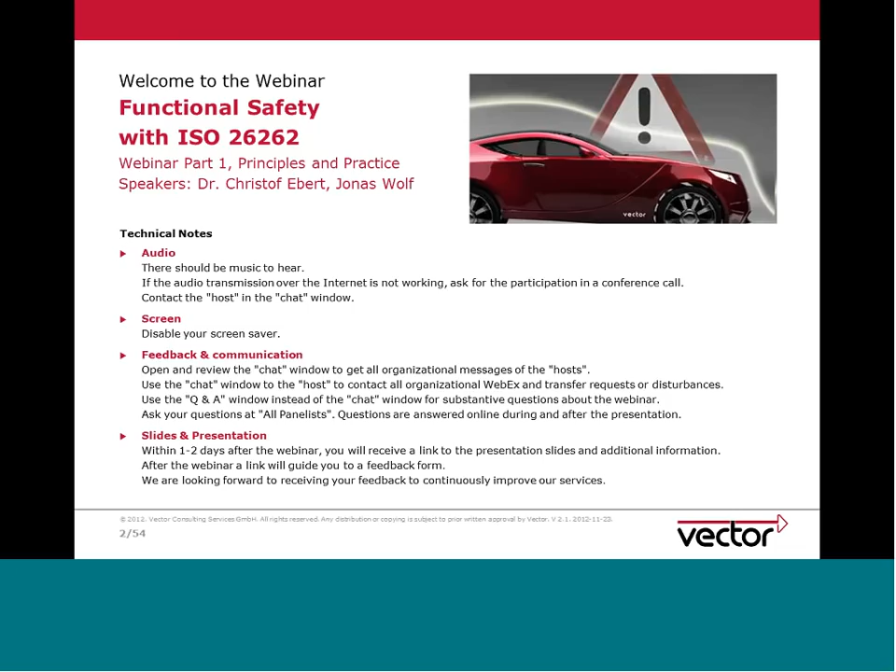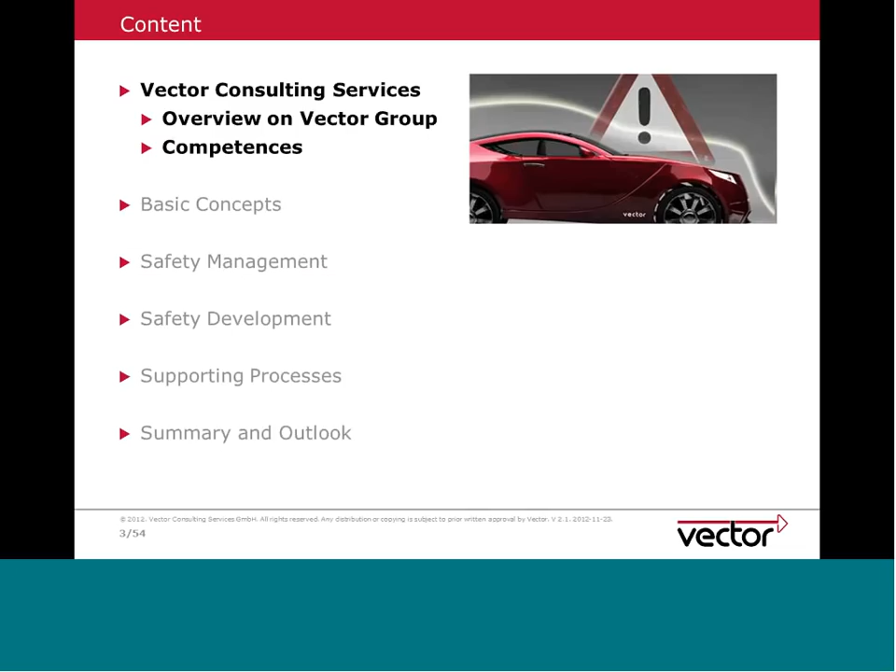The structure of this webinar is that I will give you a very brief overview on Vector. We will then go into some basic concepts about how the standard is structured. We will then have the core part, which is experiences on safety management, safety development, and support processes. And I will conclude with a brief summary and an outlook on what the standard means for different market players like OEM and Tier 1, but also what will be the evolution.

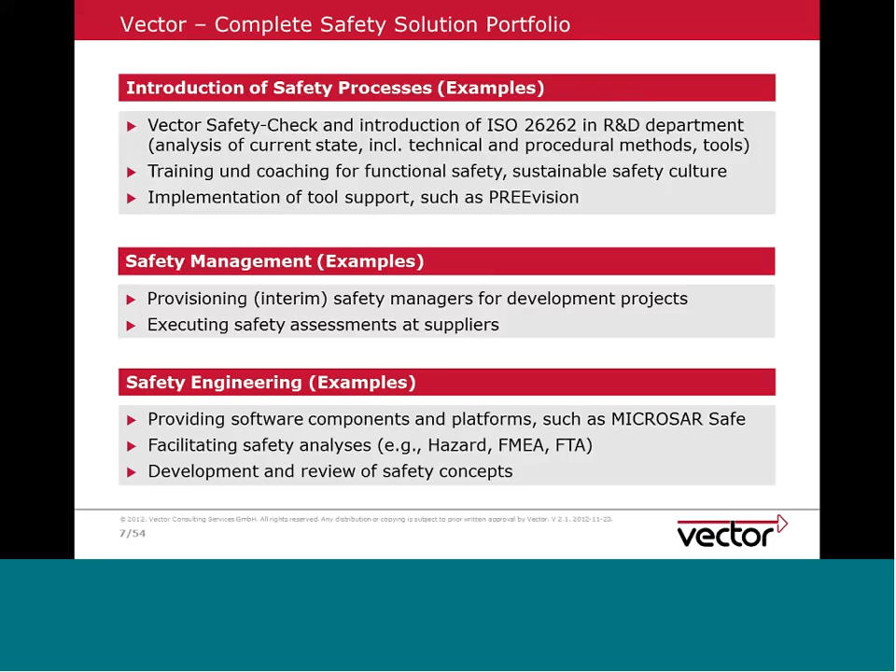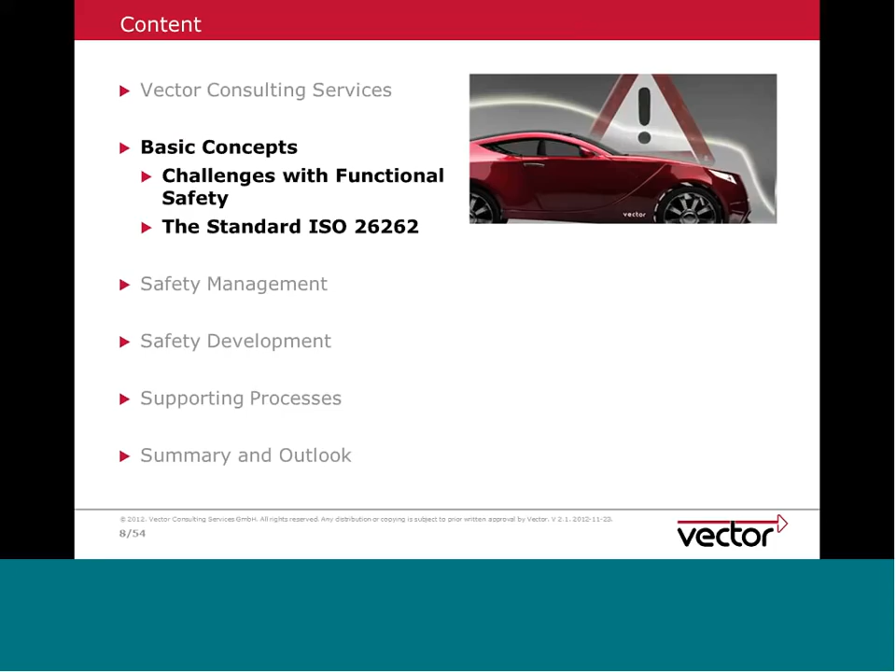After this brief introduction, we will now look into basic concepts of the standard, just so that we have the right motivation. I keep this short because I assume that most of you have already been exposed to the standard. As said, the majority of this webinar should be on practical experiences.

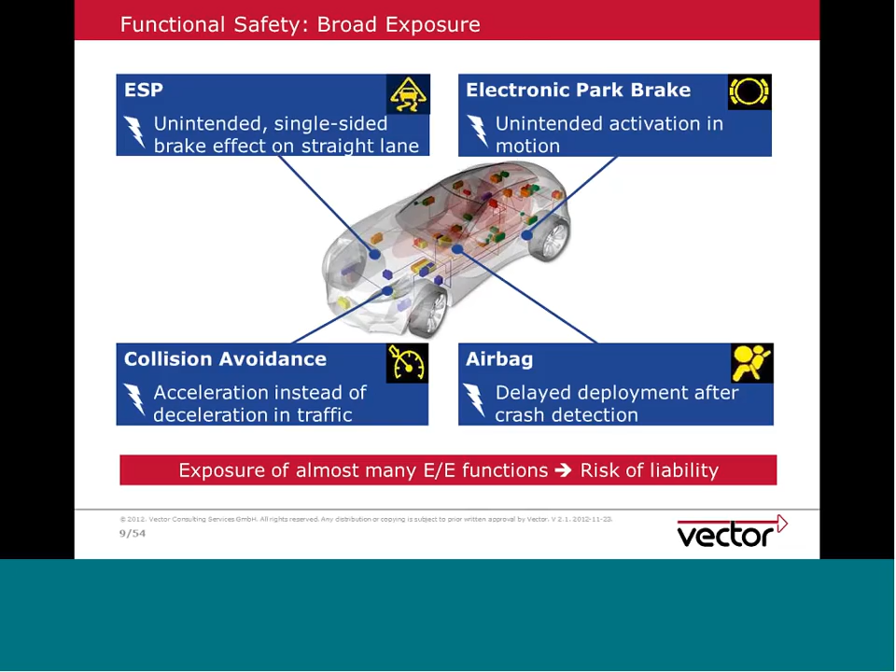Functional safety has a broad exposure. We see that with the growing interworking of a variety of assistance functions inside the car, that all have, for instance, elements of impacting the driving dynamics, and that of course then could create safety risks for the driver, but also for the public. And for that reason, there's a growing need due to this broad exposure of the E/E functions to make sure that they perform as intended in order to limit the liability risk.

Functional safety not only has a broad range of different functionalities, but also wide impact across the life cycle. If we see the life cycle, it's not only related to, for instance, testing, but it's indeed end-to-end from a system concept to the different implementation steps up to the integration and release, including also field operation. And we show with these different colors how different activities are impacted by the 26262.

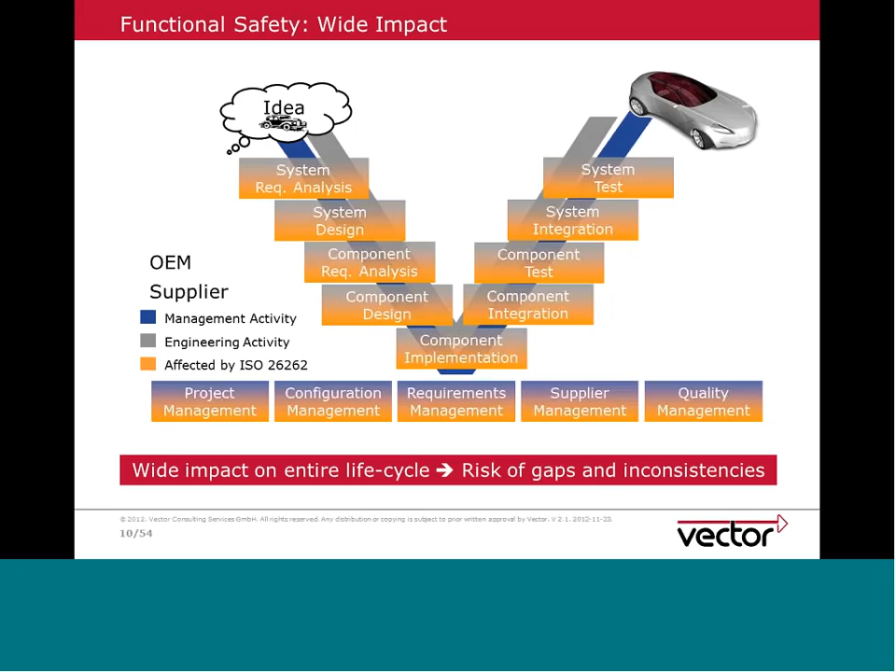And it also means that clearly OEM and suppliers are impacted. Even if the liability is initially with the OEM, certainly the supplier also has to make sure that he follows with his components the overarching safety requirements.

Functional safety can be achieved with many different techniques. So from a mere economic perspective, we should also be aware that we use the right methods and techniques. We have seen with customers often a kind of overkill in certain arenas on the right side of the V, a lot of overlapping verification and validation techniques, which in the end create extra cost but not much extra value from the perspective of safety, and maybe even provoke certain gaps just because there's a mismatch in understanding the methodology.

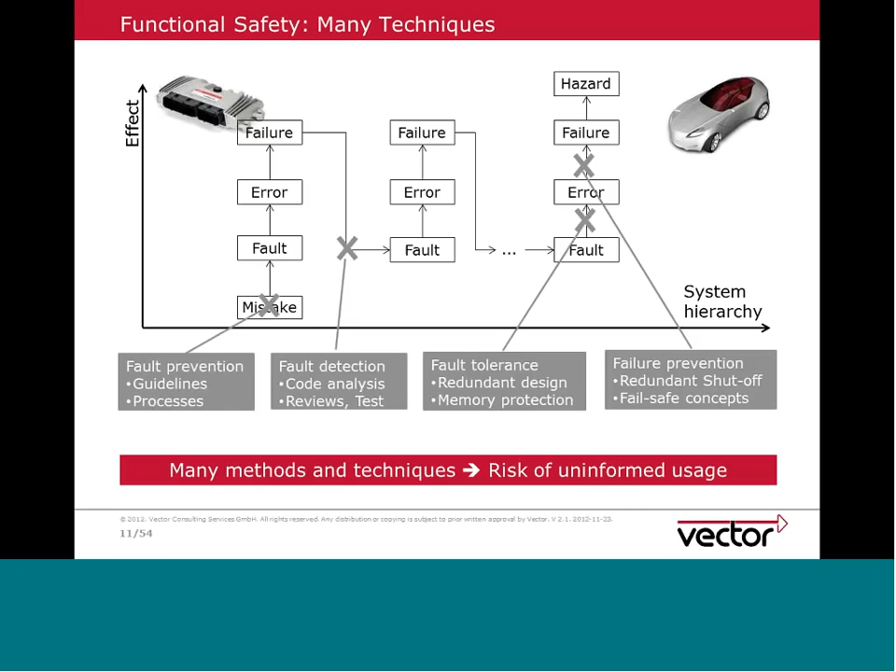So we need to intelligently combine techniques for fault prevention, detection, tolerance, and then also failure prevention. And only this intelligent combination can make sure that the standard is useful also from an economic, that is from a cost-benefit perspective.

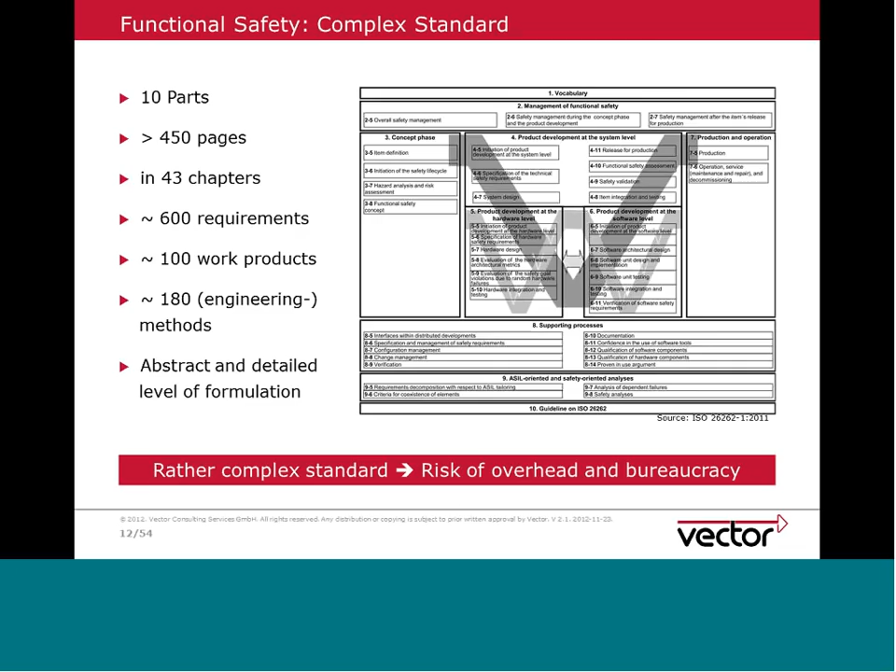And then we also have book 9, which shows how the ASIL oriented safety analysis is done. All that creates some 600 requirements that have to be addressed, and you see from this mere complexity that if the standard would be bluntly copied in terms of, let's say, let's do this and that and that, it can be extremely expensive, and at the same time maybe still create gaps because of misunderstanding of what is the intention of the standard. In other words, there is a risk of overhead and bureaucracy which has to be handled, but there is also a very big risk which we often face, which is uninformed usage of the standard.

If we develop safe products, this has to do with trust in the products, but also it has to do with what the ancients have called a moral commitment. I quote here Werner von Siemens, who said the prevention of accidents must not only be considered as a regulation by law, but also as a matter of human commitment and economic reason. What he emphasizes here is a mismatch which we still see today, that we sometimes hear what do we have to do with respect to the standard so that we are safe in case of lawsuits. Now, this is certainly a strong motivation which is driving many engineers, but initially we should rather think in terms of what do we really want to deliver as a product, what is the market perception, and at the same time also what's our business reasoning.

As I said earlier, each of the 600 requirements of the ISO 26262 creates its own cost-benefit calculation. So we have on one side a legal obligation which is certainly there and which is growing, but at the same time also a clear market and business perspective which helps us to balance the different requirements with respect to the business value. Now, what does it mean to build a safe product?

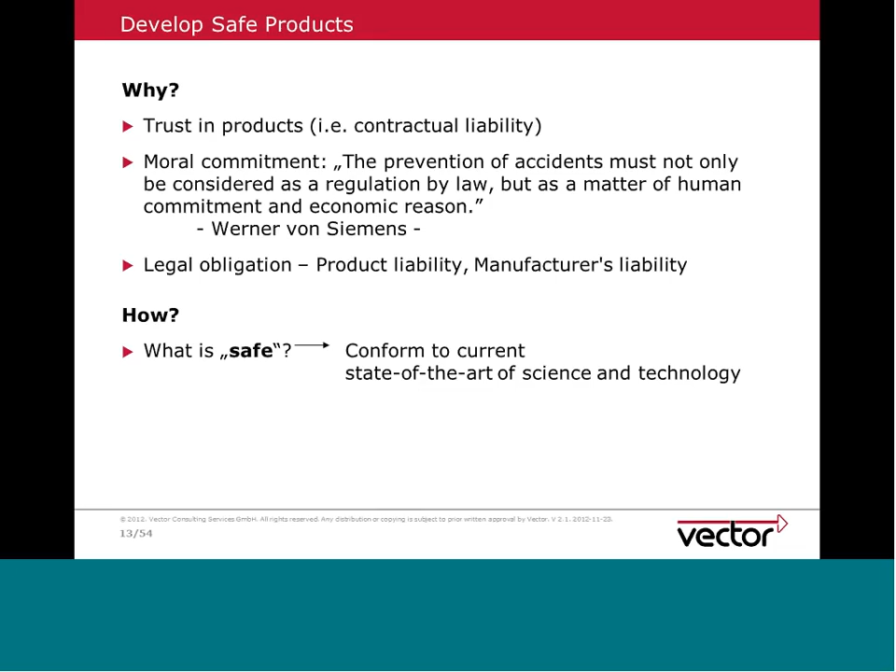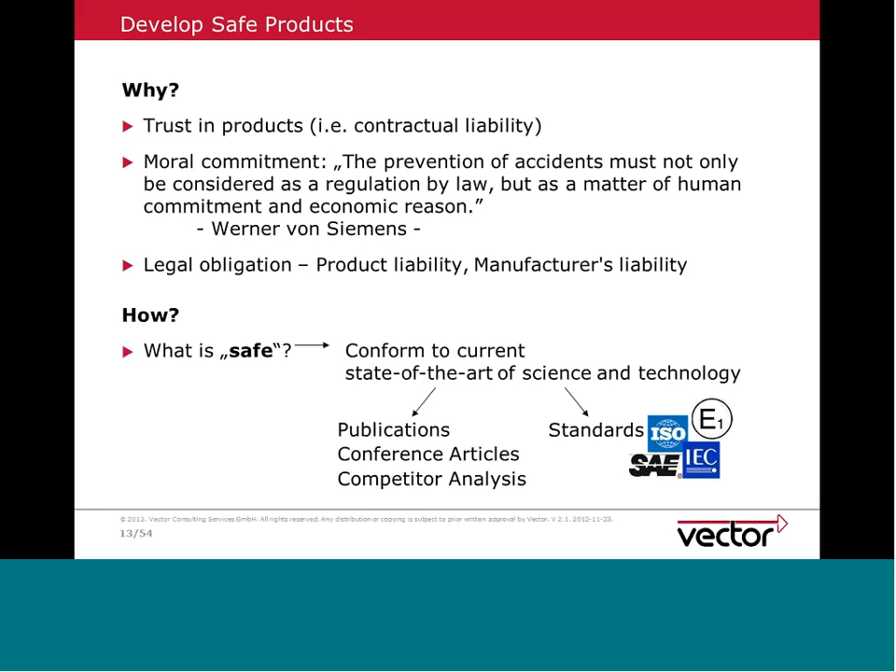The simple answer would be it should be conforming to the current state of the art of science and technology, which is typically brought together by, let's say, publications and at the same time also standards such as the ISO 26262. Such a standard summarizes the current state of the art and would be used in the case of a lawsuit, to see whether the supplier has followed the principles which should be applied when bringing a product to the market. And this is exactly summarized also on the right side, where we talk about product liability, that a product put into service must provide the level of safety which can be expected by the general public.

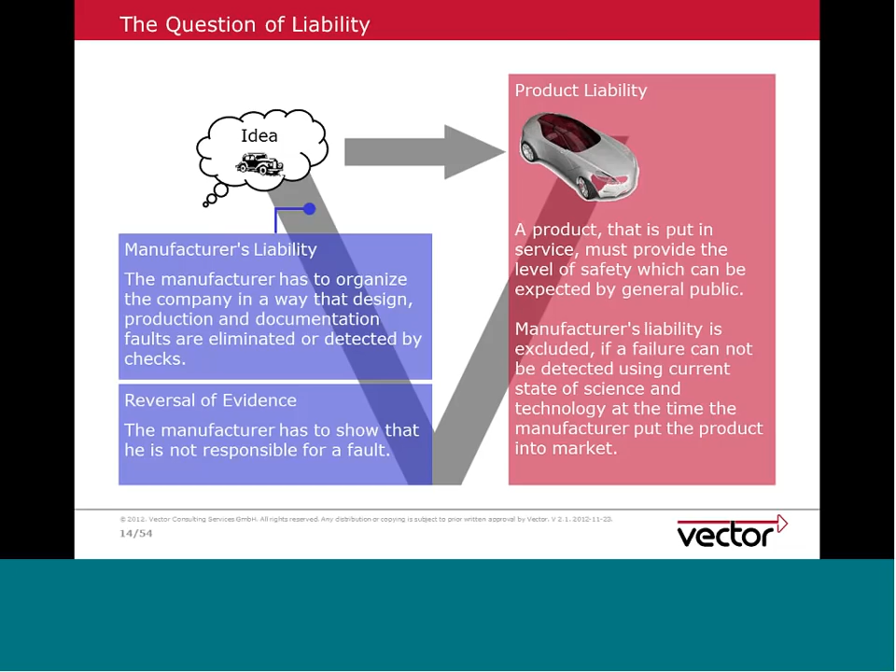When we say general public, just as a side comment, this is what in automotive is a big difference to some other disciplines such as aerospace or transport, where the assumption is clearly that the drivers, the operators have been severely trained and utilize this training. This is something which we would not expect from car drivers, and that makes the design of the product a little bit more difficult compared to what we see in, let's say, transportation.

Now, with this concept that the supplier must make sure that he follows the state of the practice, we also have the legal principle that the supplier, in the case of damage, has to prove that he has actually performed the state of the practice.

This is what we have called the reversal of evidence, and what it means is that he should at any moment be able not only to tell I have a certain standard applied, but also document by means of work products how this standard had been actually applied in the concrete design, development and production of a specific component.

Now, in order to facilitate that without much overhead, ISO standards have been created to mutually support each other. We have, for instance, process-related standards which are based on the ISO 15504, which relate very nicely to quality management standards such as the ISO 9000 series, and then specific standards for quality requirement, such as, for instance, the ISO 26262. The idea is that companies should apply all these standards so there's not a big overlap.

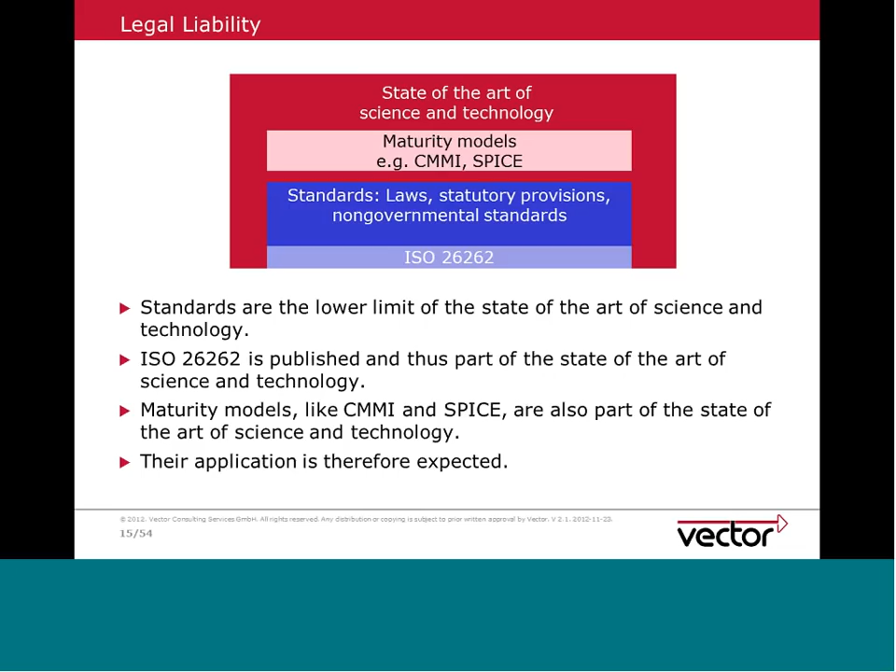The entire idea of process culture, of making sustainable change, is something which is explained by ISO 15504 and for instance CMMI. The ISO 26262 is using these concepts, and this is why we say the application of these frameworks is expected. It's not mandatory, but clearly is a huge advantage.

The scope of the ISO 26262 is initially in the domain of passenger cars, which go into series production with a weight of below 3.5 tons. Now, what it actually means, if we take this, is a rather small application domain, but we see in practice many companies which are active, for instance, with the truck industry or the vehicle industry, the off-road agriculture industry, that they would not only use specific standards such as the ISO 25119 for the agriculture domain, but would also increasingly have a look to the 26262 because of its wide range of usage and a much bigger body of experience compared to the rather narrowly used specific standards which we face in the vehicle, agriculture, etc. domains.

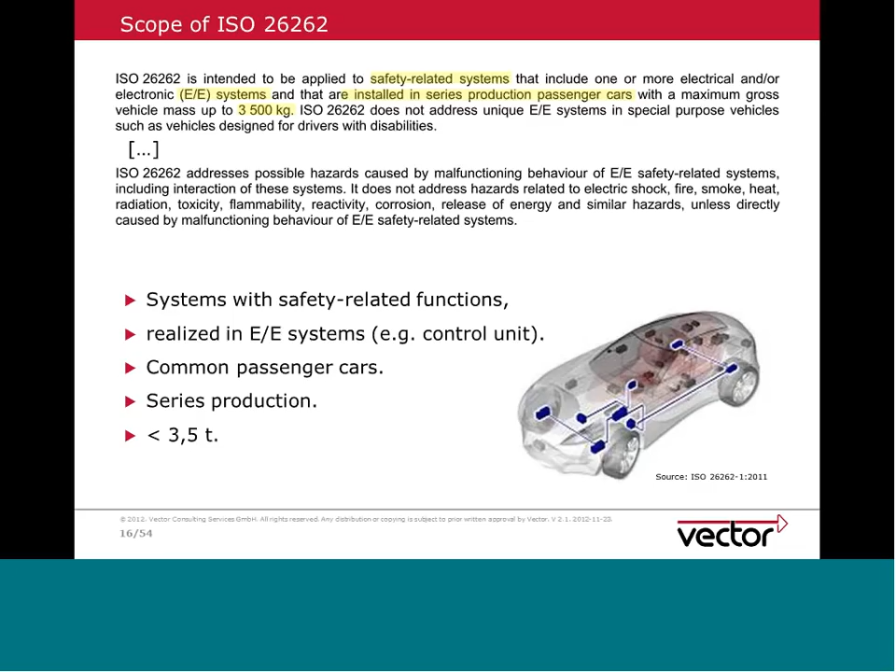In other words, what we recommend these days is that with specific standards such as machinery or agriculture related to functional safety, it's worthwhile looking into what are best practices out of the 26262. Maybe even implementing the 26262 to the certain degree that it covers the specific domain standards, but actually you benefit with respect to methodology, with respect to best practice, with respect to tools from the wealth of experiences of the 26262.

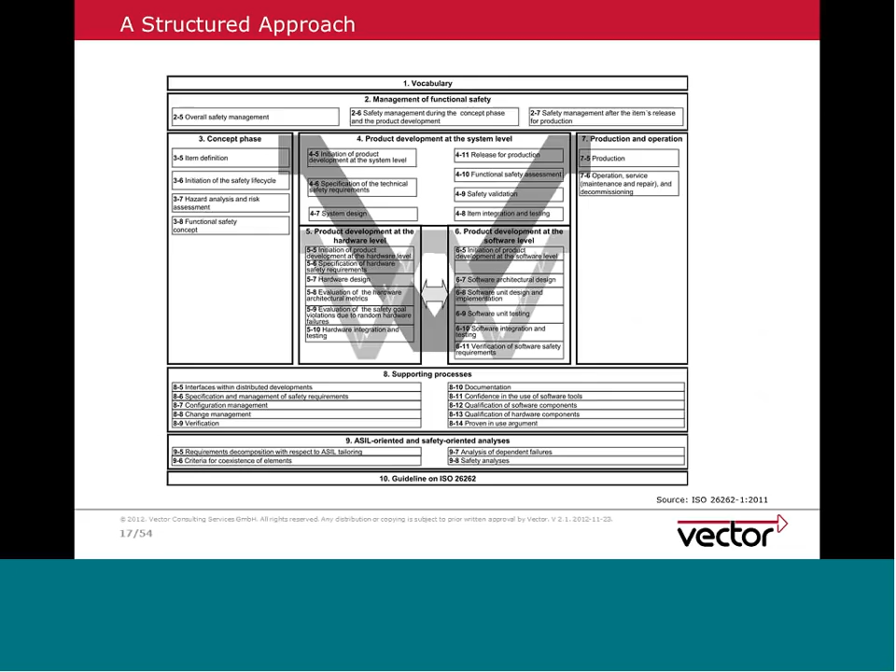We have already zoomed into the 26262. What we want to emphasize again is that it is a very systematic and structured approach with 3 basic domains, which is the management of safety, the development of safety, and supporting processes in order to keep certain safety processes up to date and also related to each other.

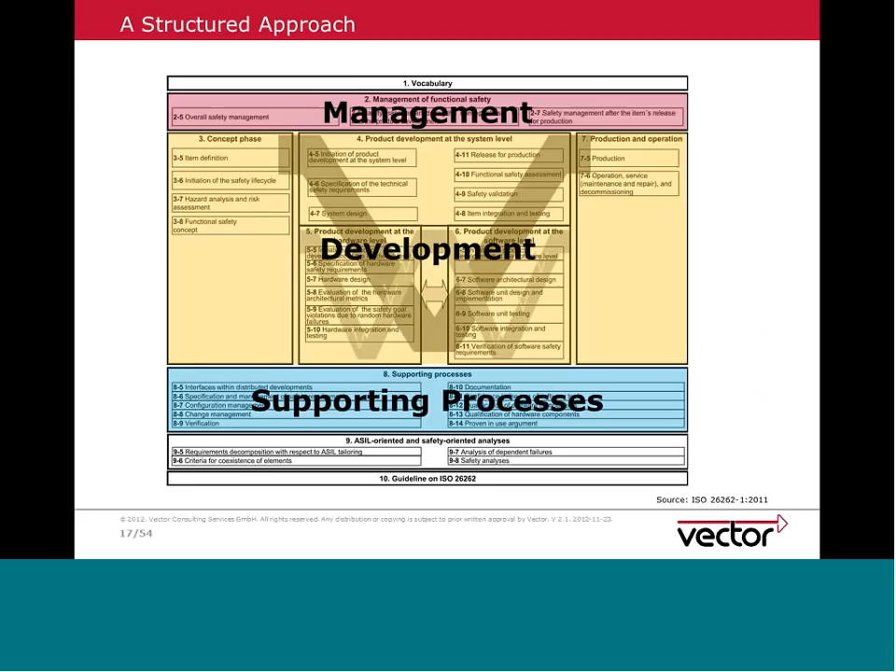We would then start by looking to the broad concept of ASIL classification, because this is at the core of the standard. And what we see is there's a set of factors which altogether give us a risk. The risk has to do with the exposure, the way we can control the specific risk, and a severity, which is to which degree would we really have casualties or accidents in the case of a malfunction or failure, and as a counterweight, what is called integrity, which helps to balance the 3 other factors.

The picture on the lower part explains this briefly. If we expect the tolerated risk for any component in a car is achieved by means of QM, which has been a long tradition, then adding some functionality could increase the exposure, could increase the severity. A brief example would be if we had in the old days a pure non-electric way of steering wheel, of braking system, etc., or of any kind of dynamic functions, adding some assistant function like an ESP or an ABS, etc., obviously adds to the risk, because suddenly some failure in these components can, for instance, mean that the brake or the dynamic stability is not anymore given.

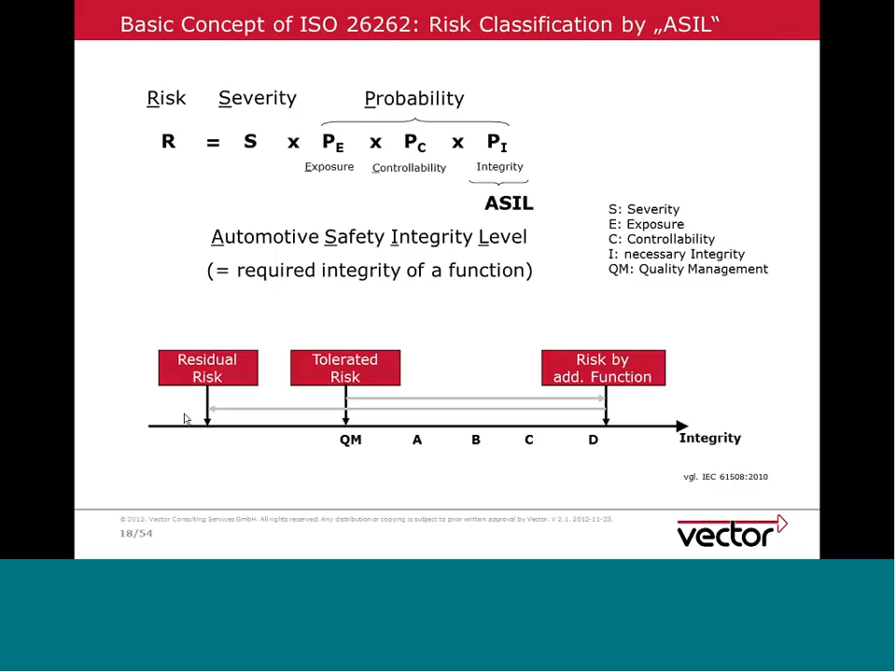A second key element of applying the standard is that we have to make sure to address both random and systematic faults. Random faults typically have to do with hardware faults we cannot really predict, we can only statistically analyze, so we have to diagnose, monitor, and make sure we have the right level of testing in order to immediately highlight if there is a malfunction on the hardware side. Systematic faults are a little bit more critical, because they have to do with the way we design, develop, and engineer, and finally test the product.

So here we need methodological, or systematic, measures, starting with analysis and design techniques up to consistent traceability and proof of safety. These are two very different approaches which both have to be applied in order to reduce the risk in the way the previous slide has just shown.

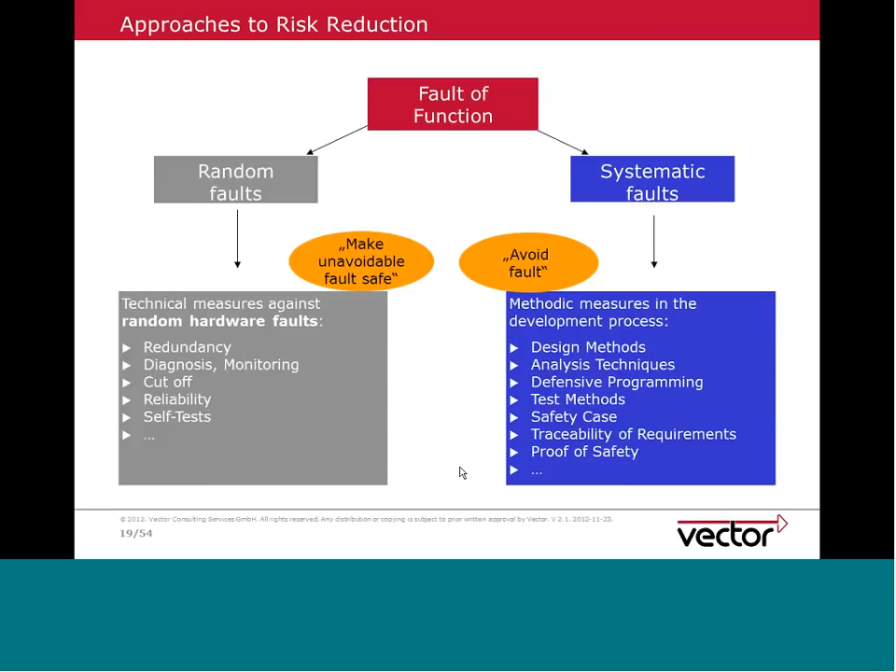Now, the determination of an ASIL level has to do with severity and probability of exposure, of control, and finally the related integrity. In other words, if we have certain controllability, say in a range between 1 and 3, let's take the middle, a certain severity which is high, and a certain exposure which is also rather high, we have a combination of C2, S3, E3 — controllability, severity, exposure — which gives us a clear mapping towards what would be necessary from a perspective of safety integrity. In that case it would be what is called ASIL B, automotive safety integrity level B. We can see with that small example that if we would increase the exposure, we immediately run into ASIL C.

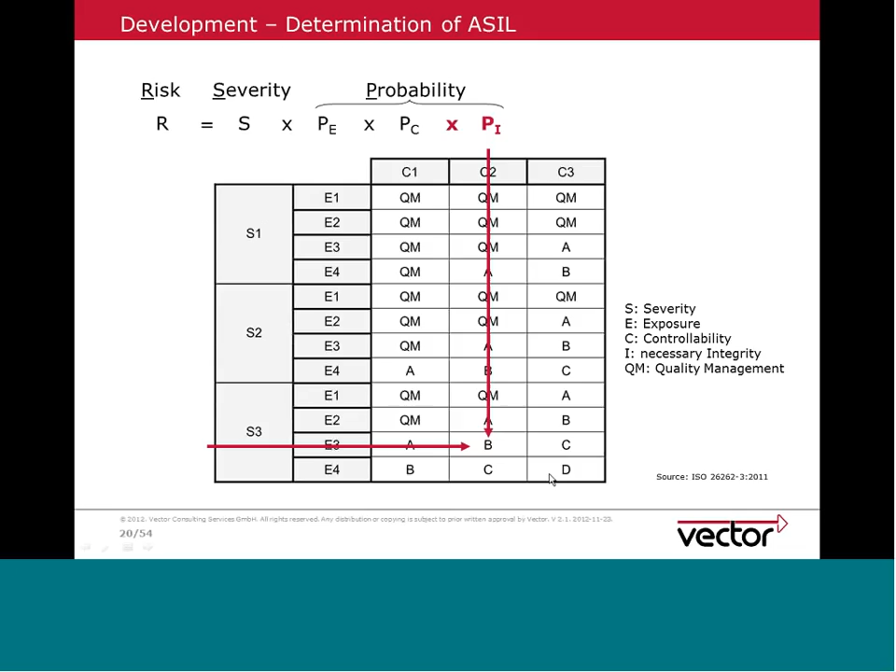The same if we would have less controllability, we would also be in C, and if both of that happen, we would have even ASIL D, which is the highest of the 4 ASIL categories. According to each of those, we would then have specific measures to apply.

Or in a practical example, as here, we talk about a brake-by-wire system, and you see that we need to look into the specific use case in order to identify hazards, which would then tell us what the ASIL level would be in this specific situation.

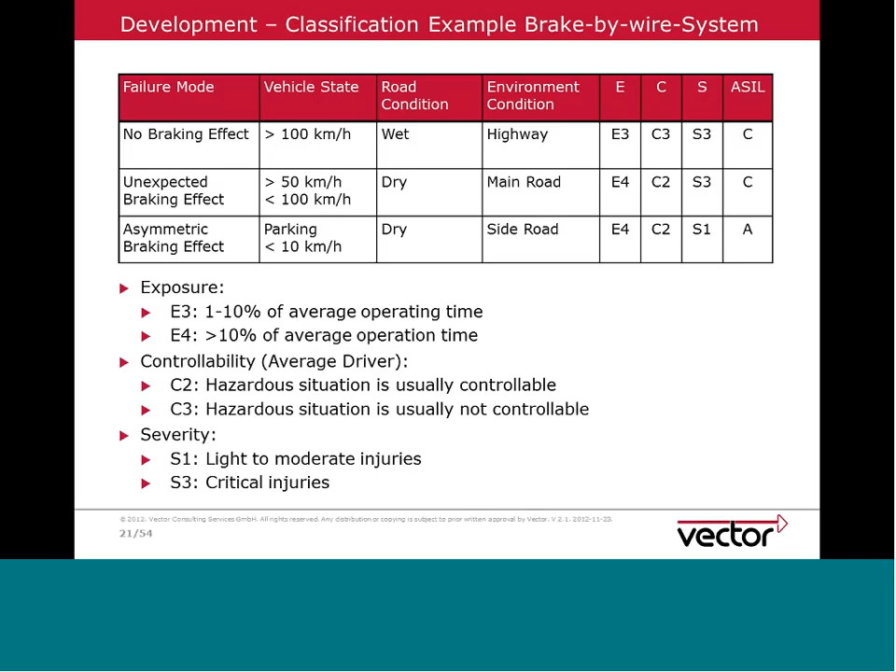To summarize this part, there is not an external ranking of systems which would tell you this system has an ASIL X and this has an ASIL Y, but it really depends on the specific use case. It depends on the design of the car, how and which of the ASIL levels would be really applicable.

Now, we want to briefly look into some of the experiences in implementing functional safety, and as a starting point, we identified a set of typical questions which are asked to us by customers, about how this or that is done.

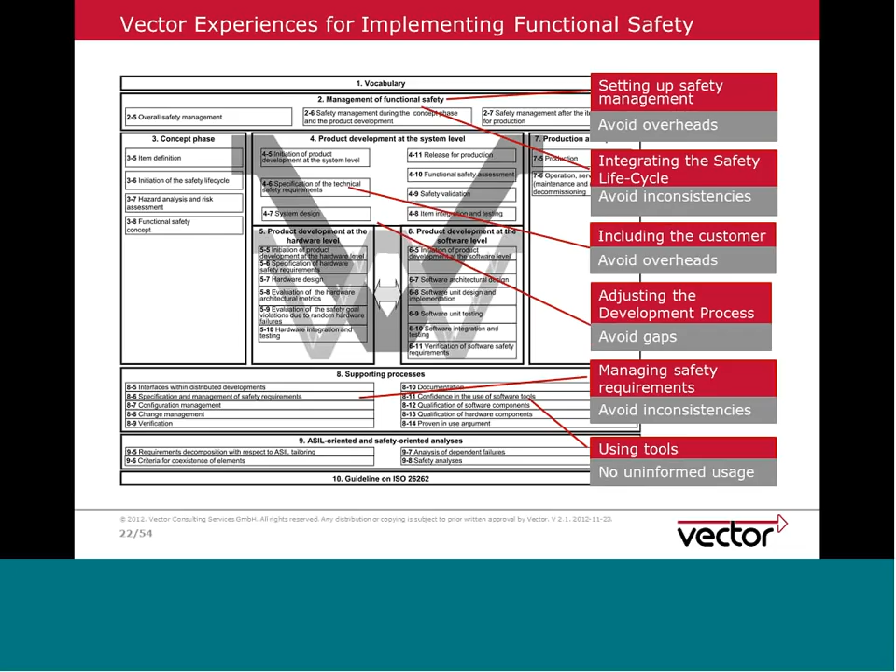We want to emphasize, and you see that in the gray boxes again and again, that it is not wise to try to copy the standard into your engineering processes. This has to be done intelligently in order to avoid unnecessary overheads.

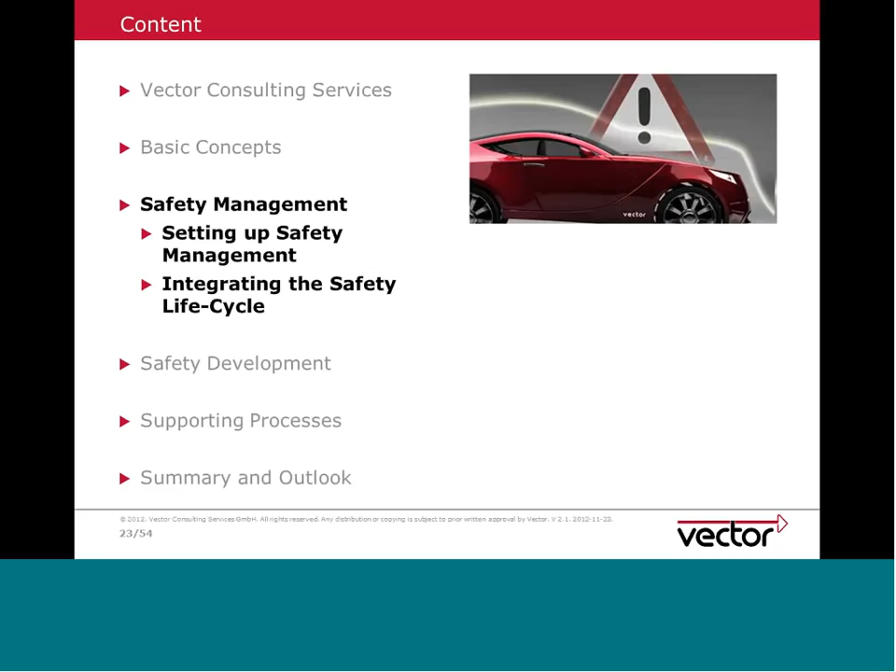Let's start with safety management, where we look into two domains as examples: first, to set up safety management, and then to integrate the safety life cycle. Setting up safety management means that we have an effective and at the same time lean management of all safety aspects. Now, some of the guidance which we typically provide — and again, this is not a complete cookbook — just gives you some ideas how to implement ISO 26262.

For instance, what we often see is certain safety measures such as specific code reviews, unit tests with a certain coverage of C0, C1, maybe code analysis, etc., would be done in the development of ECU software. However, suddenly under pressure, people would step backwards and would not do these activities anymore. And they would say, well, we still have tests somewhere later, and they would find the defects. This is a clear indication that there is not a safety culture.

And obviously that is also something which, in the case of an accident where you should prove what you have done, you would clearly fail, because what would not be available is consistent documentation about how safety measures have been implemented. In other words, safety culture starts top down — there's no way building up ISO 26262 bottom up.

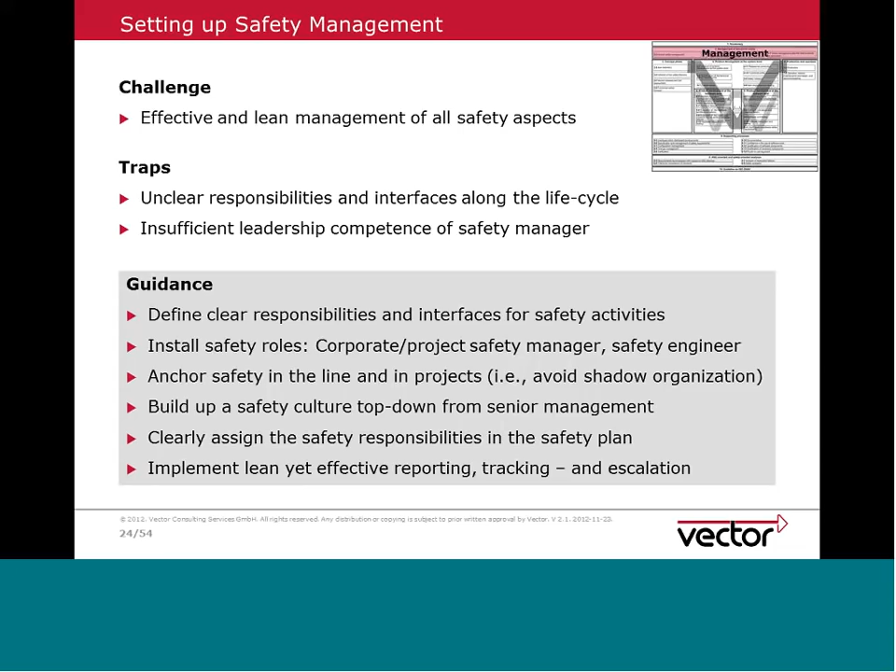What can be done is, of course, that senior management would be specifically trained and coached in order to understand the needs, but at the same time also pushing, and that is their fair right, pushing the engineers into a lean application of the standard in order to be more cost effective.

A second topic which we often see is a misinterpretation of what does it mean responsible for safety. In the meantime, most organizations have started to implement what is called by the standard a safety manager. However, what we often see is that people would then point to that safety manager and say, well, if it comes to safety questions, this is the person. This is obviously not the idea of the standard.

What the standard clearly says, and what is normal, is that the role of the safety manager has to do with coaching, has to do with planning safety activities, but the execution is a regular engineering activity. It's the same as each person who is writing a work product should also do the respective reviews to identify defects. I mean, we don't send a document to someone else if we haven't done our own review on that.

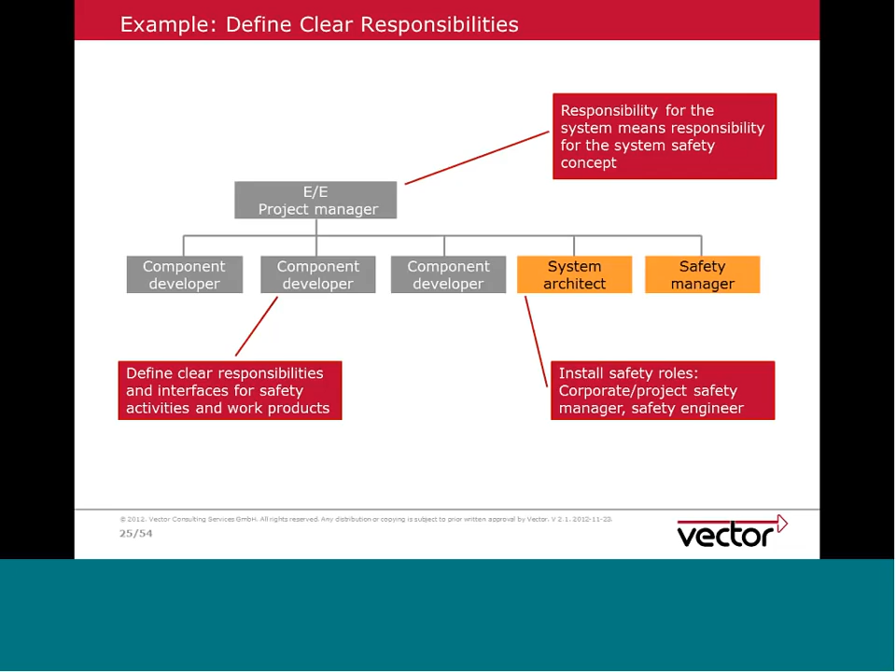And that's the same with safety. As an engineer, we should always personally check that we deliver the right quality level. So safety has not to do with pointing to the safety manager to do all the work. It has more to do that each role has its own responsibilities. And this is part of the culture change which I already mentioned, that with knowing all these responsibilities, we also know that there is a budget need behind.

And it's evident that if you go from 0, that is QM, to an ASIL, let's say CD, the additional cost, which is somewhere in the range between 30% and 100% plus, compared to the old behavior, is something which has to be planned, to be budgeted, and where also the competences have to be trained.

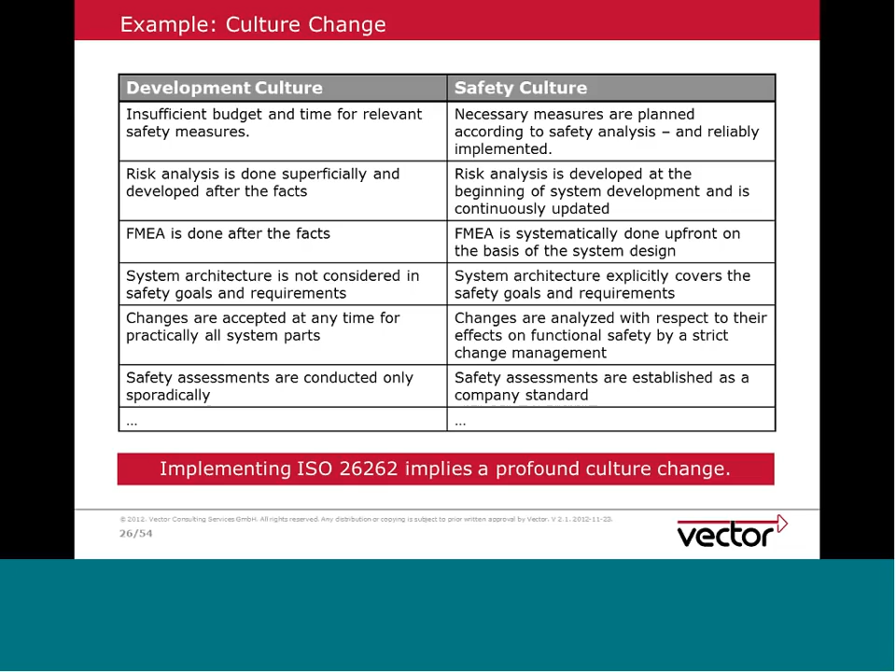It's insufficient to just assume somebody would get onto a safety training, would be the expert engineer doing a criticality or hazard analysis. In other words, this has to be planned, competences have to be continuously updated, and this means what we call early safety needs profound culture change.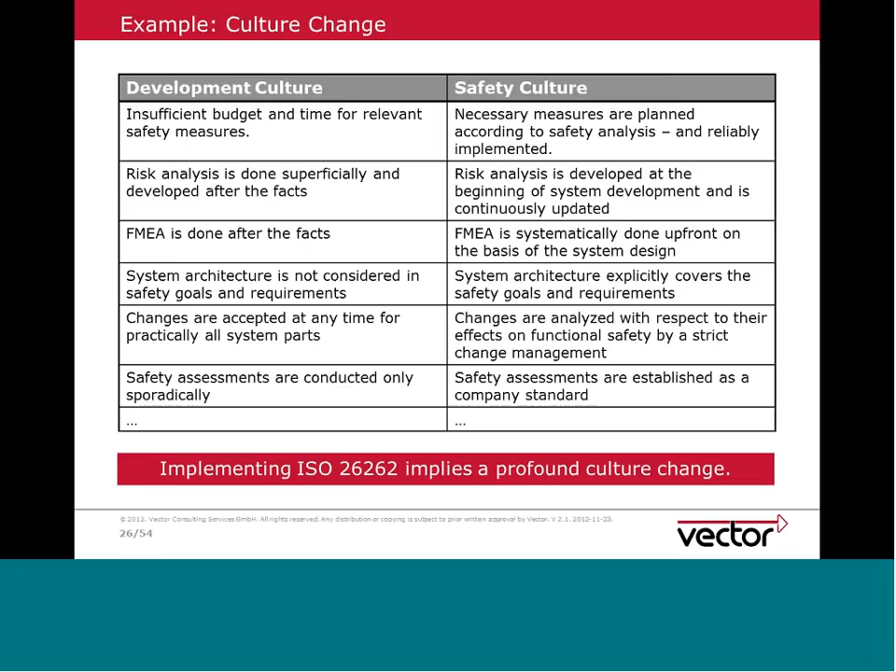Now, second topic here was integrating safety lifecycle with different project activities. What it means is that a key concept which we learned over the years is we should not make a kind of a shadow safety process, but rather integrate the safety activities with the regular project activities.

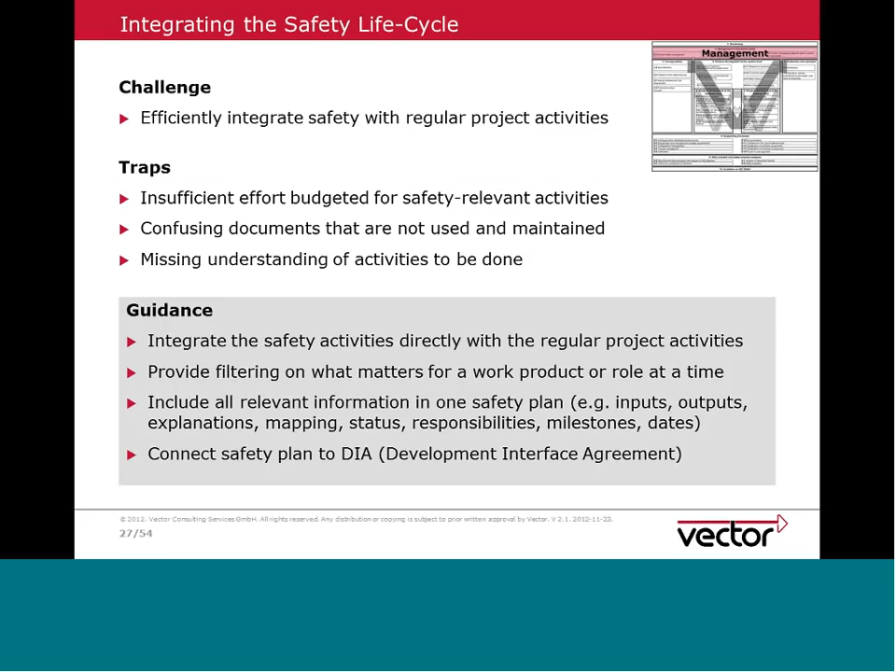That is, the project planning would include also the necessary safety activities, which could of course be tailored according to the ASIL level. Or for instance, when we talk about interfaces, which we often have in the supply chain, we need a development interface agreement, a DIA, which would then also be used by the safety plan as a reference on the responsibilities.

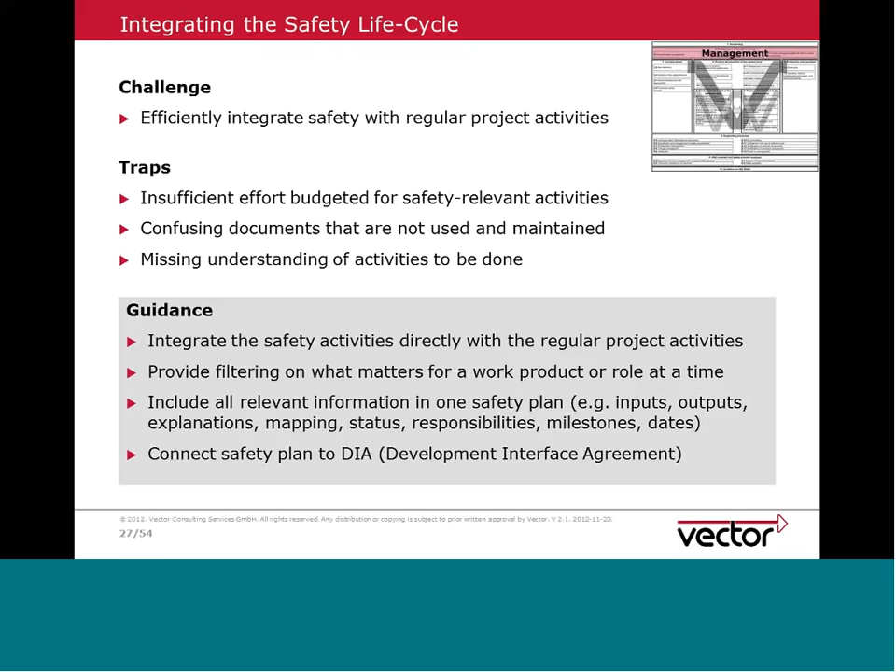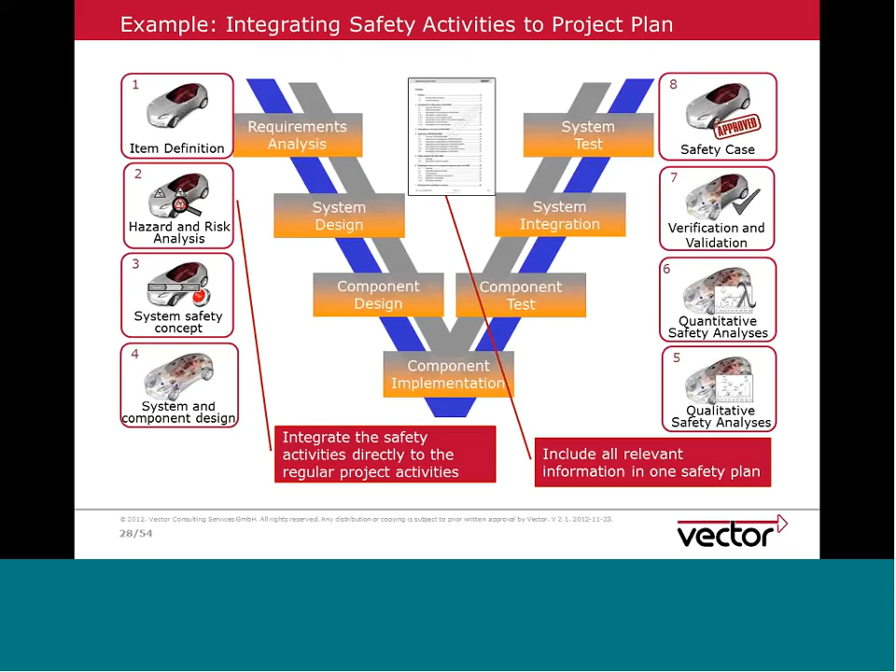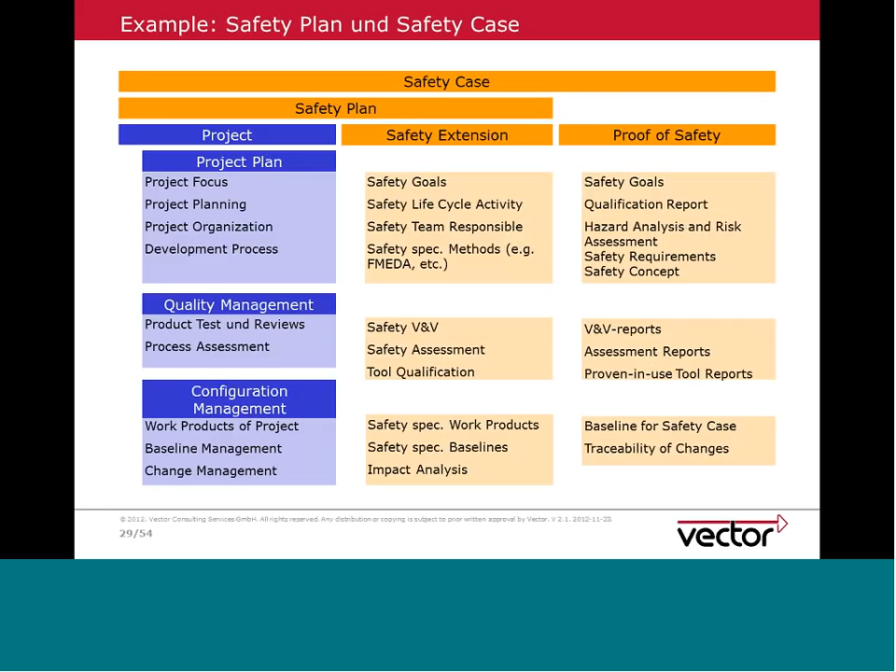In other words, what we want to highlight is we don't have a silo which is called project plan and another silo which is called safety, but we rather have a safety plan which consists out of a project plan with certain extensions that, for instance, depend on the ASIL classification.

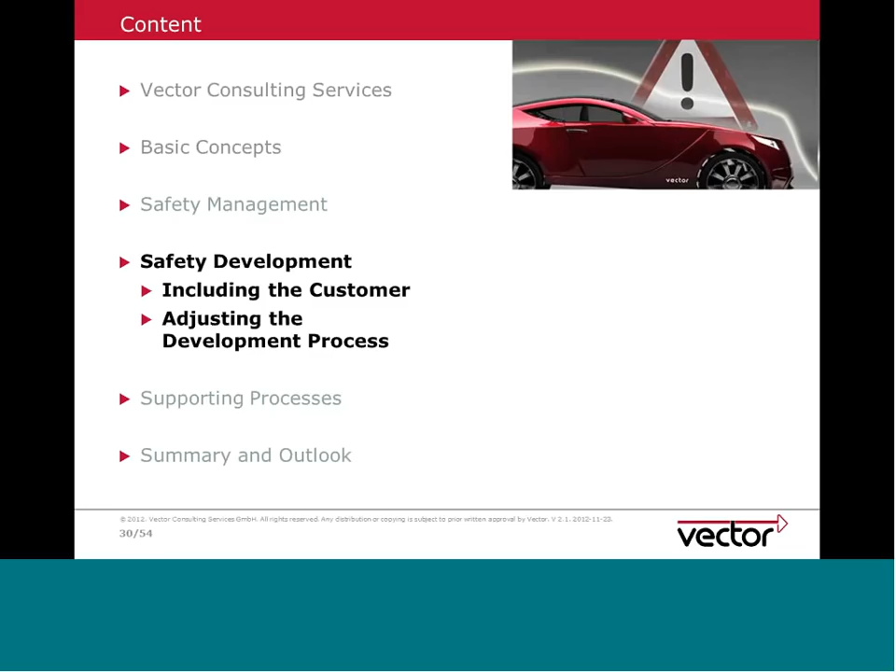Having now looked into management, let's proceed with development. And here we identify two topics which we have seen very often misunderstood, or we find that guidance is necessary. One is to better include the customer, and the second one is adjusting the development process according to specific safety needs.

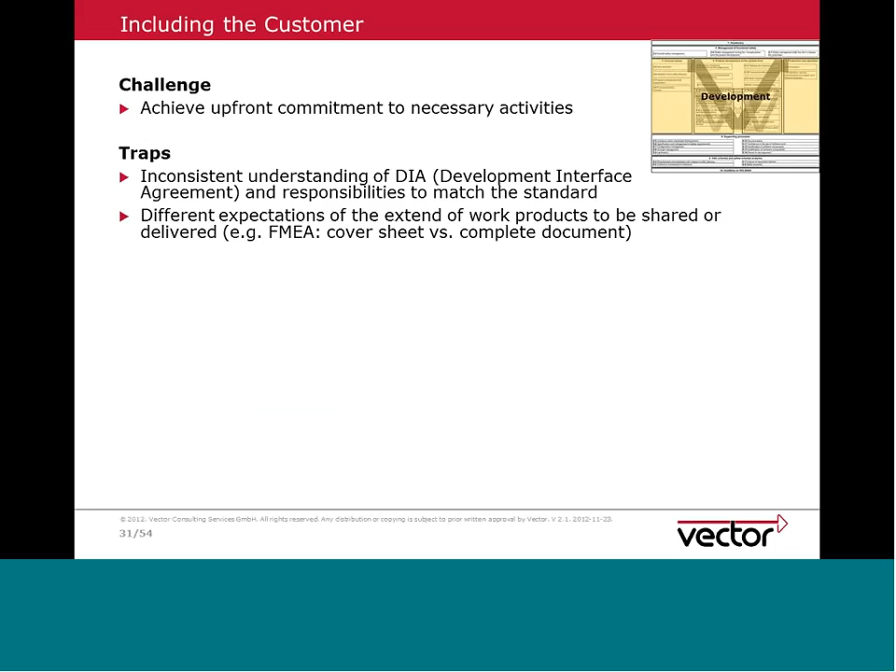Now, including the customer means that independent of where we are in the supply chain, we should have a good understanding of how our component is actually used on a next higher level. This means, for instance, if we would be a supplier to an OEM, that part of the systems analysis, of course, would need our component, but at the same time also would have a need to show us what's left and right of our own component in order that we can make the right system level functional safety analysis.

As a guidance, what we often recommend at the very beginning when people get confronted with ISO 26262 is to go through the regular process of engineering and then make sure that the necessary safety-related responsibility, which later on we also have to document, is mapped with RACI schemes, so we know who is responsible, who is accountable, etc. At the beginning, so that we also have visibility about how specific roles interface with each other and contribute to making a product safe.

As another recommendation, the activities which 26262 demands, these 600 requirements, after some tailoring, should be part of the regular project planning, so that sufficient effort is budgeted.

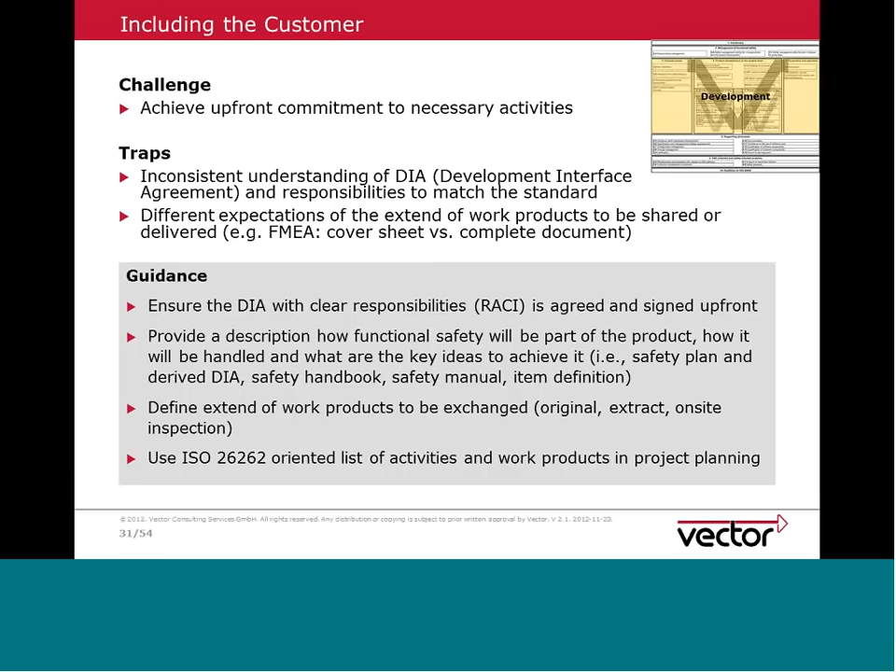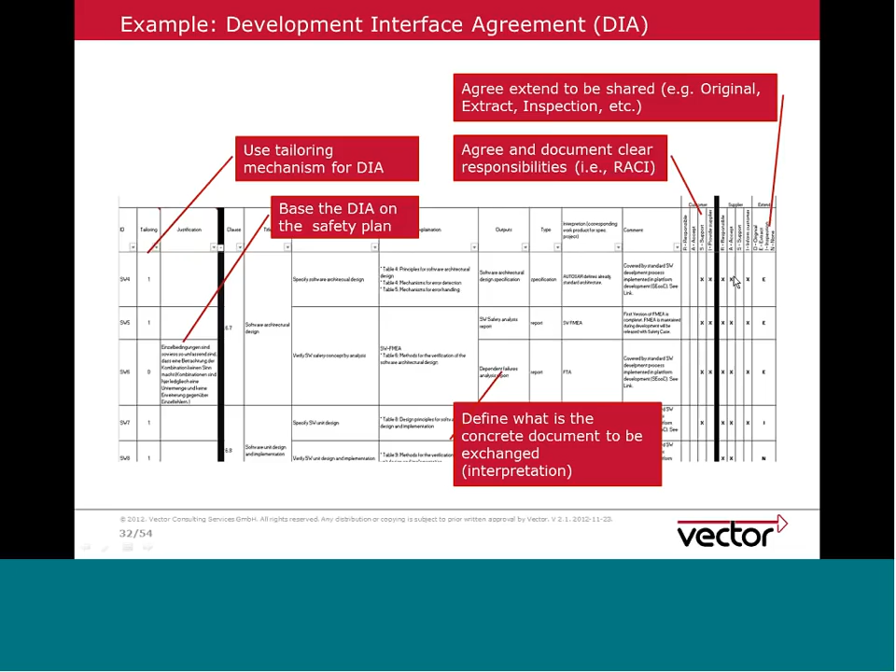Here's an example of DIA as it could be done, now done on the basis of an Excel tool. At the same time, you can also use any type of responsibility or workflow system. The important part is that we have a way to tailor the content, since in some cases we need an activity, in some cases we don't. And we have clear mapping of responsibility, so if there's later on a need, we can always trace back and say this is what person X had done in order to keep the product safe.

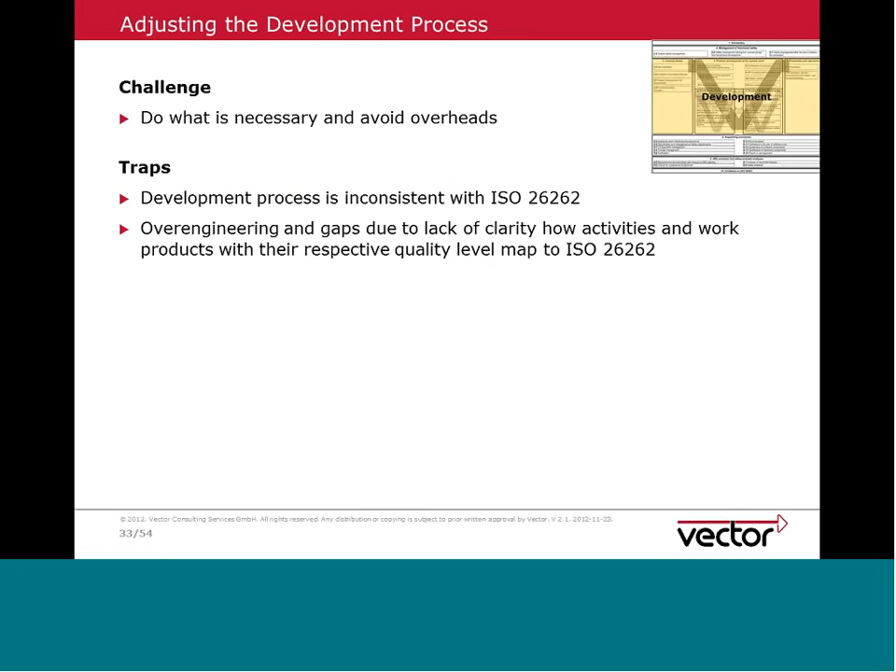Another topic we often see is that the development process needs to be adjusted to be consistent with 26262. As a key recommendation I mentioned earlier, we use process frameworks, ISO 15504-based frameworks such as CMMI and SPICE, which are widely known and applied in the automotive industry as a baseline in order to have a process framework where specific safety-related activities would then be anchored.

For instance, CMMI or SPICE demand clear verification and validation, that is the right side of the V, and this is where later on certain review and unit tests and other activities would plug in, so that these activities already have their place and don't happen in isolation. Sometimes we see people just buy test tools and then come back to us and ask: dear Vector, how do you make sure your test tools work in all environments? Then we have to explain that it depends to the degree the life cycle is structured on the customer side.

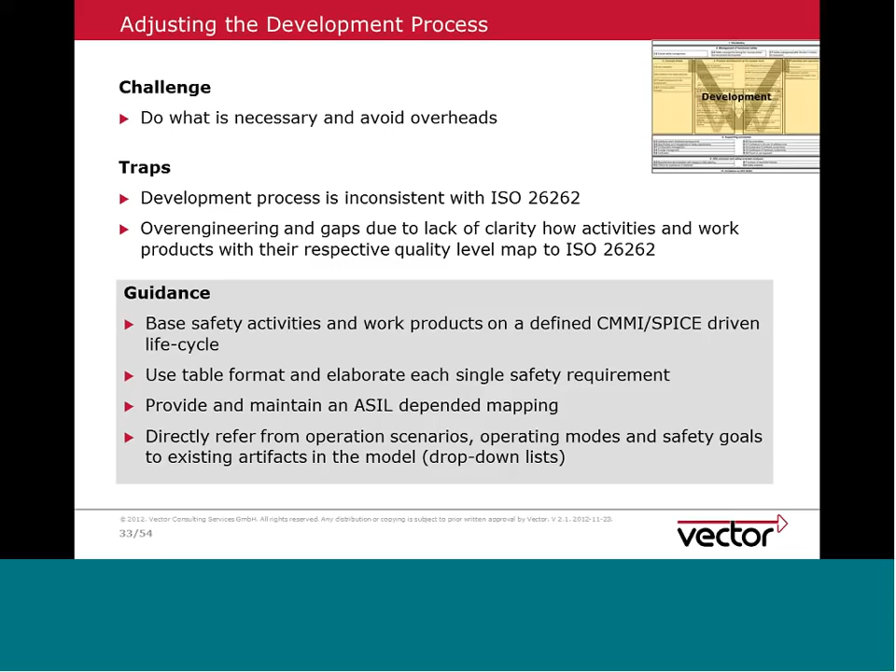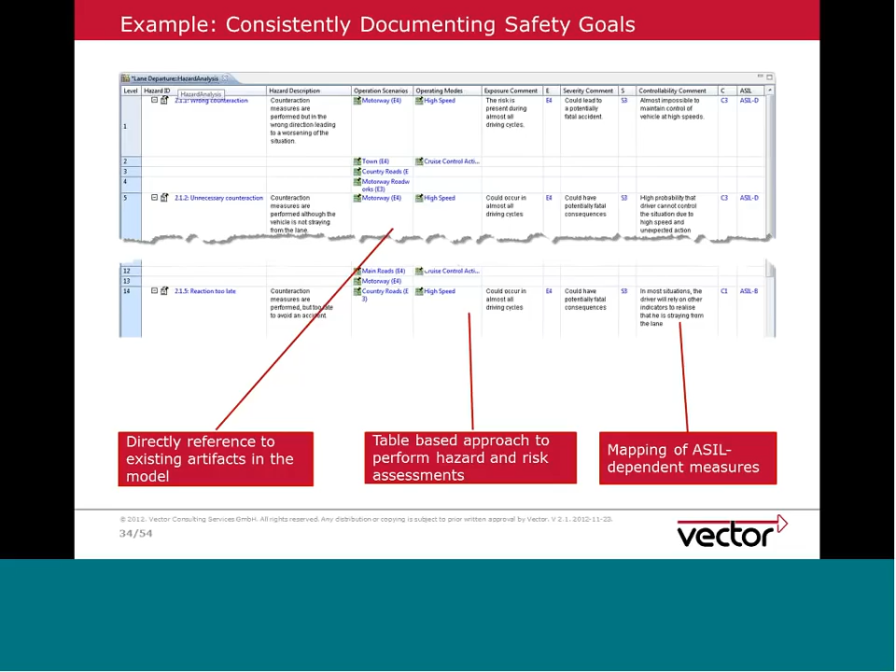Another example would be to consistently document safety goals. Here is an example where we show these documents can be done by different tools, in this case with our Preevision environment, but there are others you can also use. The important part is that any of this content would be related to each other and link into modeling or other environments, so we can easily see if there's a change, what it means, and whether we've already done some activity.

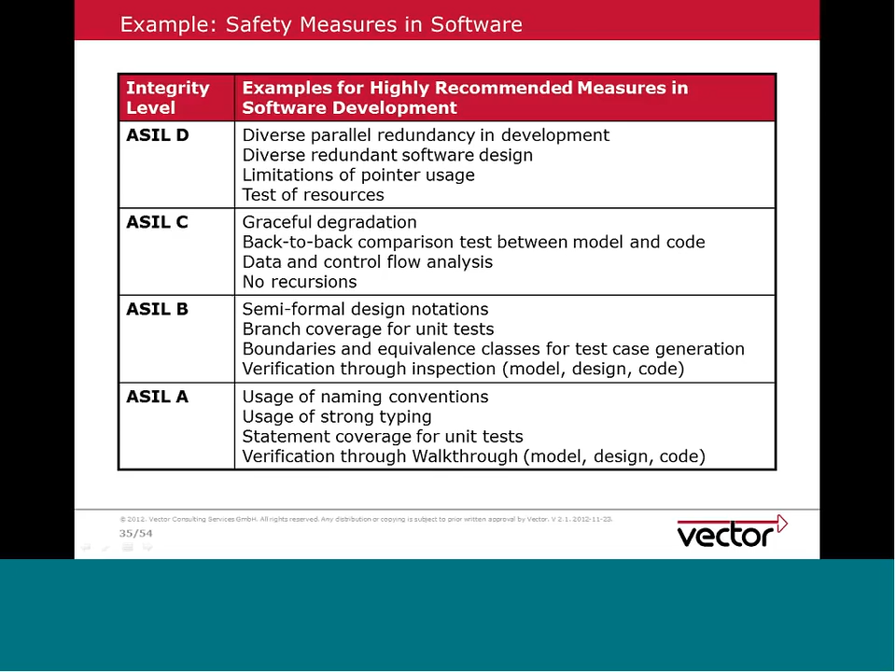So we see already here a very big difference from normal work as we would do in any kind of environment, up to very specific safety-oriented ways of handling things.

The standard typically shows this by means of o, a plus, and a double plus, where the double plus means this is a highly recommended practice. So you should think twice if you decide not to do it, because at the end of the day, this helps you deliver a product which satisfies market needs. But at the same time, as we said initially, it's also your own safety net in case of liability.

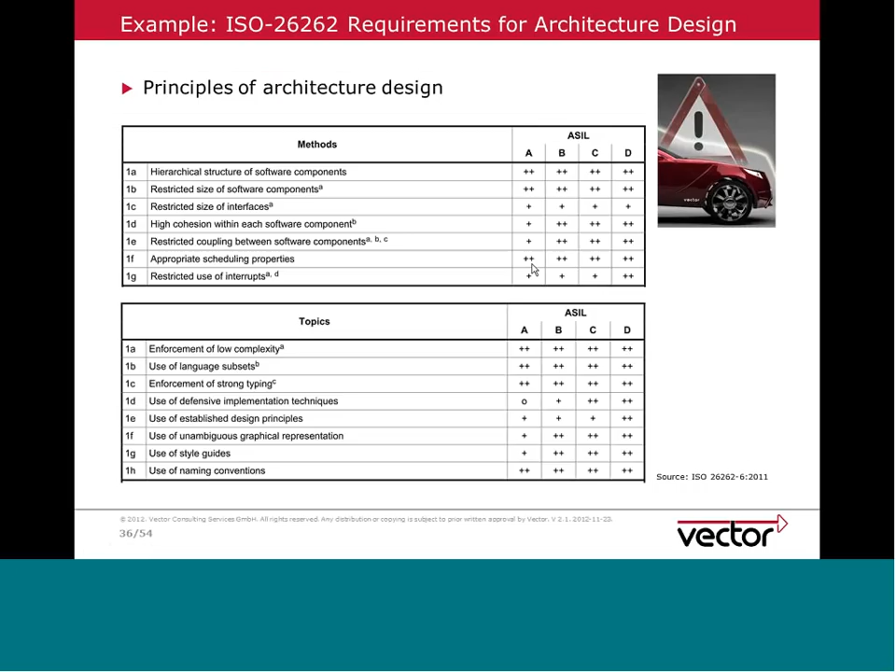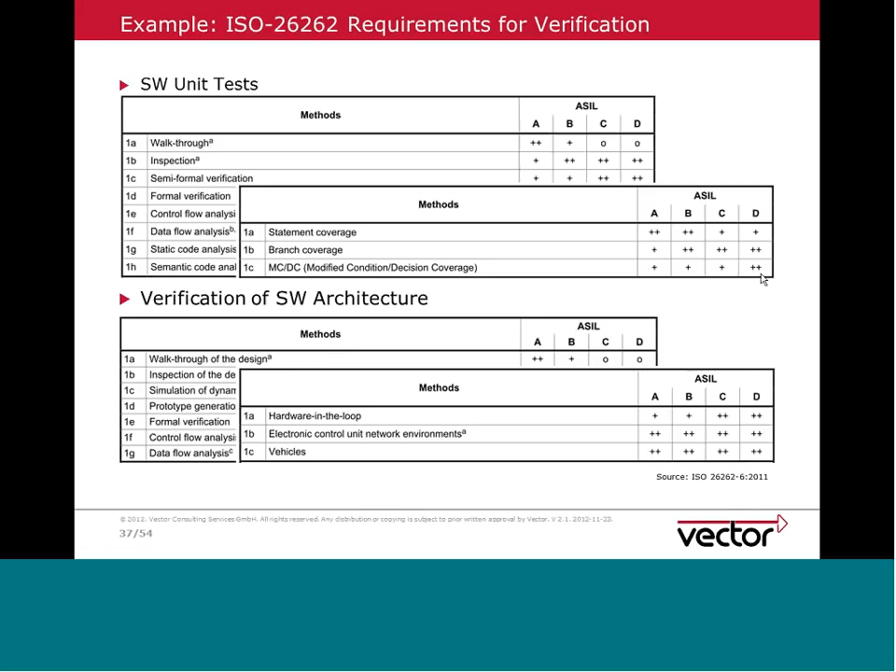In the last section, we want to look into some support topics, and here I want to emphasize two things. First, how do we manage safety requirements? So we talk a little bit about safety requirements and the requirements specification, and then in a second part about

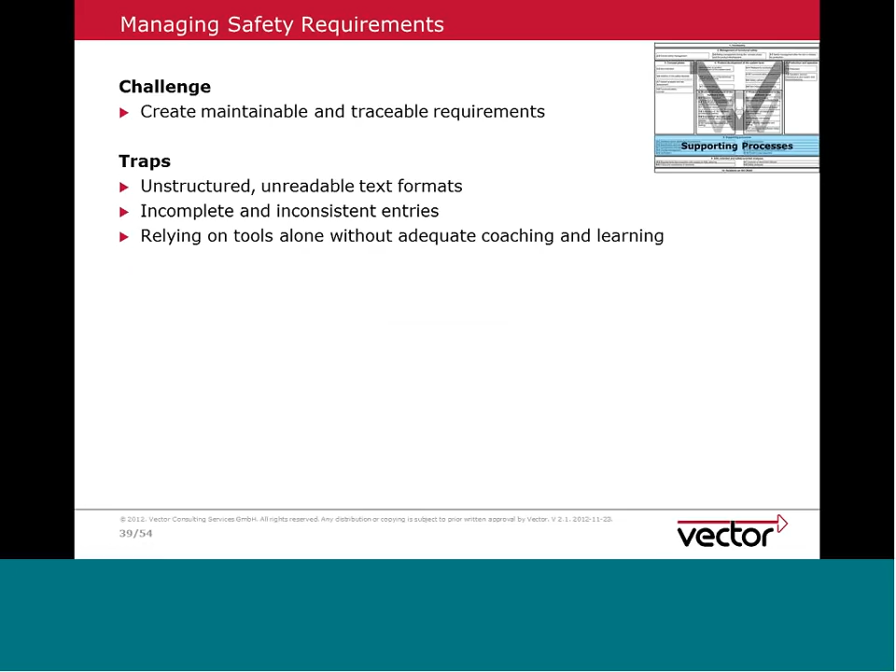tools usage. The target is to create maintainable and traceable requirements. Now, this is a target which holds for all requirements, but it evidently holds specifically for safety requirements. So we should use systematic and structured techniques for eliciting and specifying requirements. We should set up and maintain bidirectional traceability, which is maintained throughout the project.

That's, by the way, something which is hardly possible if you work only with Excel sheets or Office documents. This is really something where we strongly recommend tools.

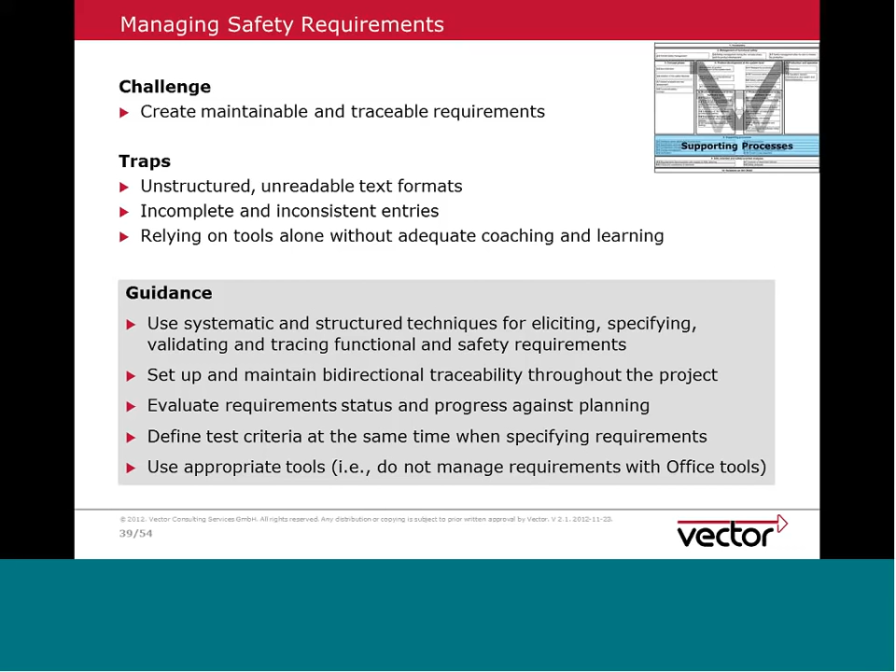But at the same time, also, for instance, to think about test criteria at the time when we specify requirements, in order to make the requirements testable, and at the same time also make sure that we have somewhere on the right side of the V some equivalent to the initial requirement, which is then also used to check whether the requirement is implemented, specifically in the case of regression.

Some examples: the managing of functional requirements. Again, we use here the PREEvision environment as a requirement tool, which is then showing specific requirements and how does it link to our hazard analysis and what it means in terms of safety functions, so that we can, for instance, apply automatic consistency checks.

For instance, if there is a small update, correction, a variant release, that we have still all necessary checks and analysis completed.

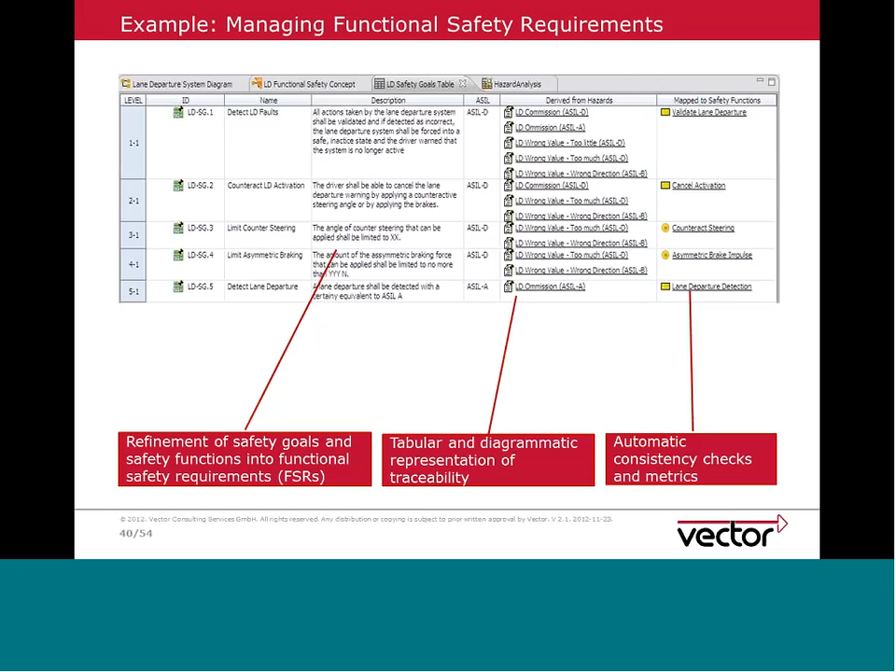A second example would be how do we specify good requirements with the target of traceability, and what we show here is, for instance, we should keep the scope of a requirement rather small. We call this atomic. We should have short sentences which are comprehensible, and we should use, let's say, understandable language so that different users would come to the same conclusion.

And again, it's very good engineering practice to think always, when writing a requirement, also about the test. That holds, by the way, on all levels of the development, not just for system level requirements, but also for code level requirements, which would then translate into what is today called test-driven development.

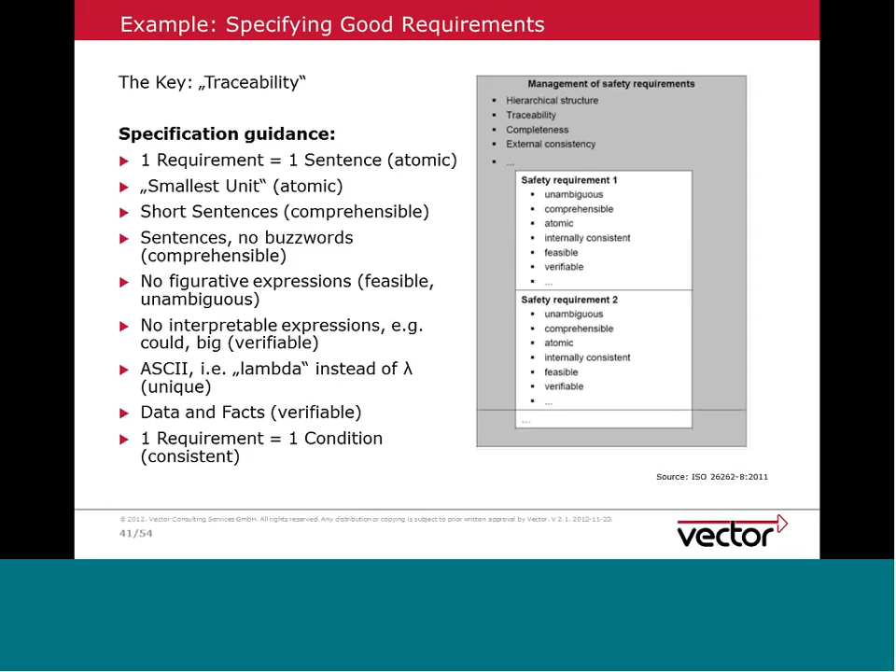Secondly, we look into tools usage. I mentioned already that office tools do not really bring much value and are extremely cumbersome when it comes to maintaining different variants, for instance, over the life cycle.

So here a strong recommendation is to have a professional tool chain which has workflow support, so that the responsibilities can be automatically assured, but also are documented later on, so that we could see a document had been released after a review, etc., etc.

Of course, we should make sure that the tools are perceived useful in order that they are used. Sometimes we see rather nice, sophisticated tools at customers which had been bought because some person told them, well, this tool is quite helpful, but at the end of the day, the tool is not really used because people had been insufficiently trained, or the environment of the tool is insufficient, and that certainly doesn't help much.

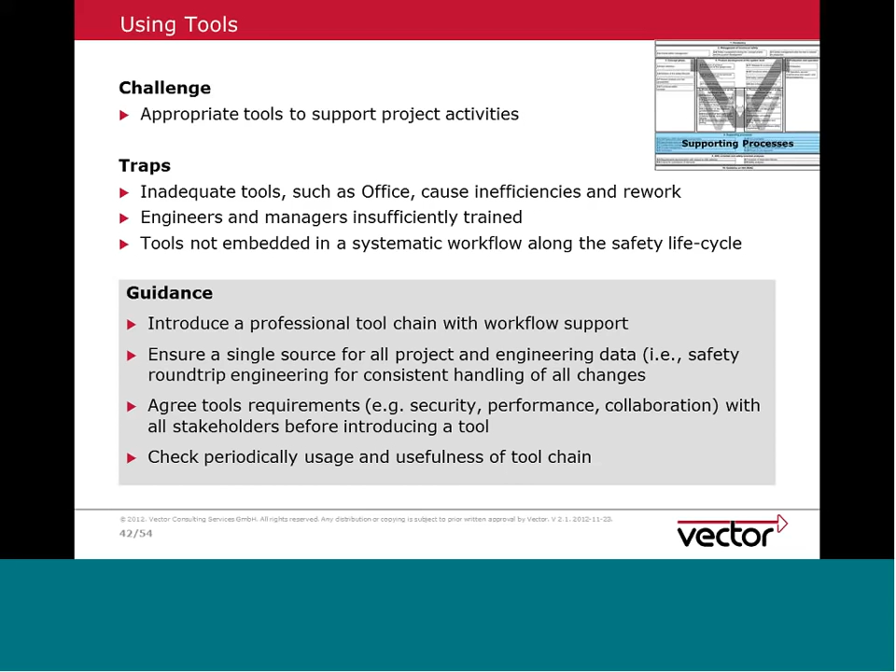So tools should satisfy different types of usage needs, such as security, performance, collaboration across sites. And this is something where, as I said earlier, we often help customers to set up an adequate environment which is specific to their geographic layout, but also to, for instance, their customer and supplier relationship.

Here's an example of tool-driven hazard analysis and risk assessment, where we would have some single base for the hazard analysis, on which we then would derive the safety requirements, and of course can then also generate automatically documents which would be used, for instance, in order to see which of the cases have already been applied.

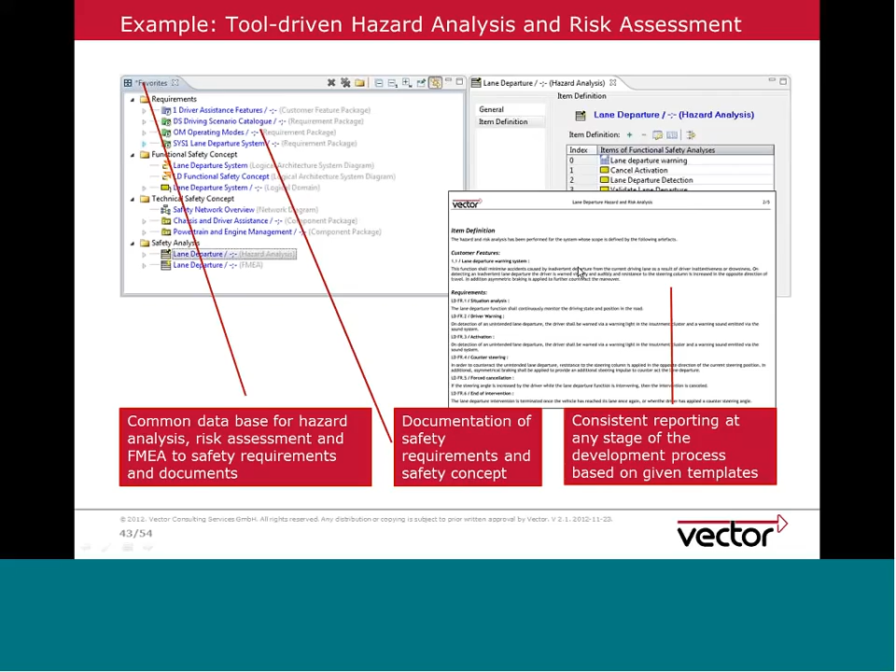Or equally, with the growing understanding that only with a decent model-based analysis and documentation we really have a full picture of different functions and their interaction, we would also see that it is extremely important, in the initial spirit of UML, that we have a single source to which we look with different perspectives, that is used starting with the hazard analysis and the functional specification up to the right side of the V with all type of verification.

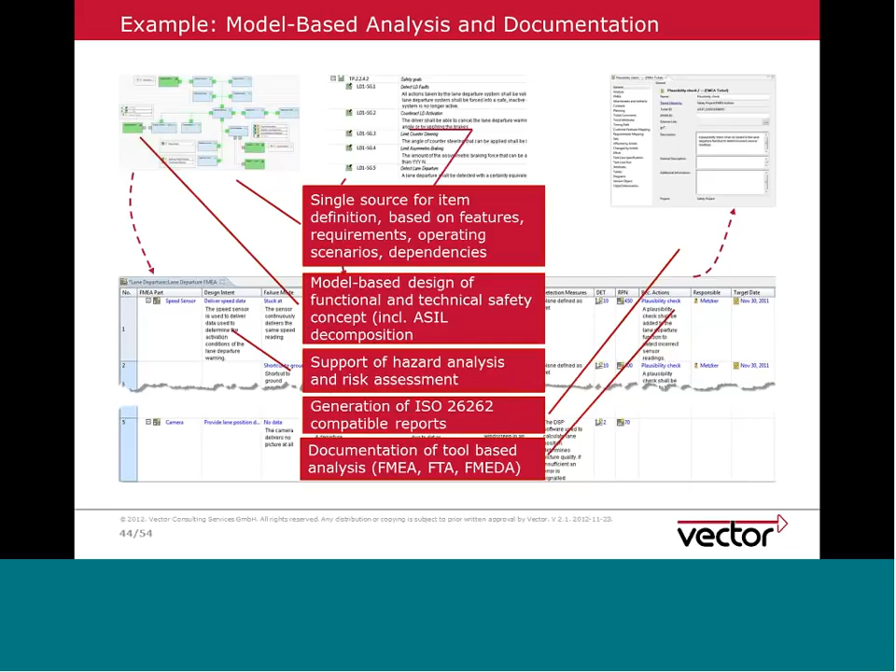validation activities. And that brings me also to the tool-based validation of a safety concept, which means that the left side and the right side of the V would be connected in what we call traceability between design artifacts and the implementation.

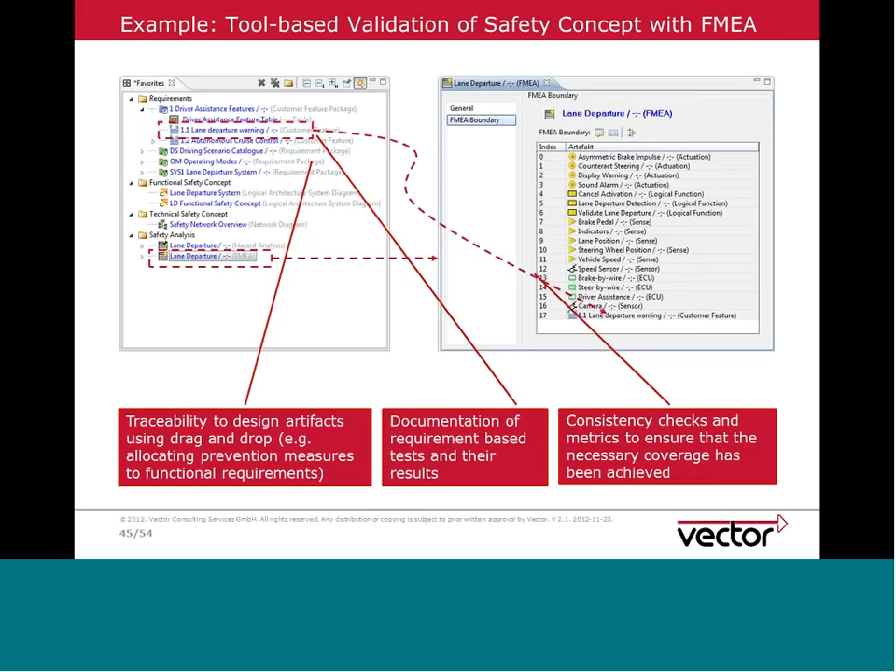Again, here tools are extremely useful because we can, by simple drag and drop mechanisms, make sure that we have the traces established and we don't have to start typing something into Excel.

As an example of such a tool chain, here's what we are doing in our AutoSAR development. You see along the V a set of interworking tools.

This is a workflow which starts out with PreEvision used for modeling analysis, DaVinci for architecture design, then on a lower level the configurator of DaVinci for the specific ECU development, and upwards CANoe being a testing environment, and CANape for the calibration. So this is a suite of Vector tools.

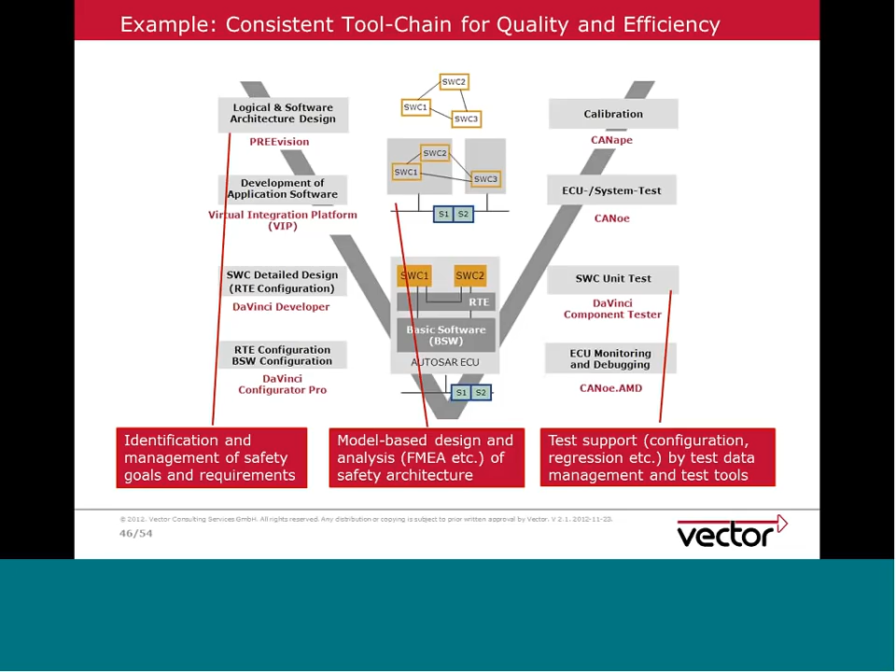You can, of course, also use a federated suite with different tools. The important part is that these tools fit together and are really so connected that if there's a change somewhere, it ripples consistently throughout the whole V.

Now, one question which we often get is about tool qualification. We should not blindly trust the tools we use, because most tools need to be qualified in the environment where they are used. ISO 26262 has also looked into qualification of tools, which is basically related to the degree of impact of a tool—whether the tool is directly responsible for generating or impacting some product, for instance a compiler, a modeling tool, or calibration data. This is a directly product-related impact, while a documentation tool, for example, is not directly product-related.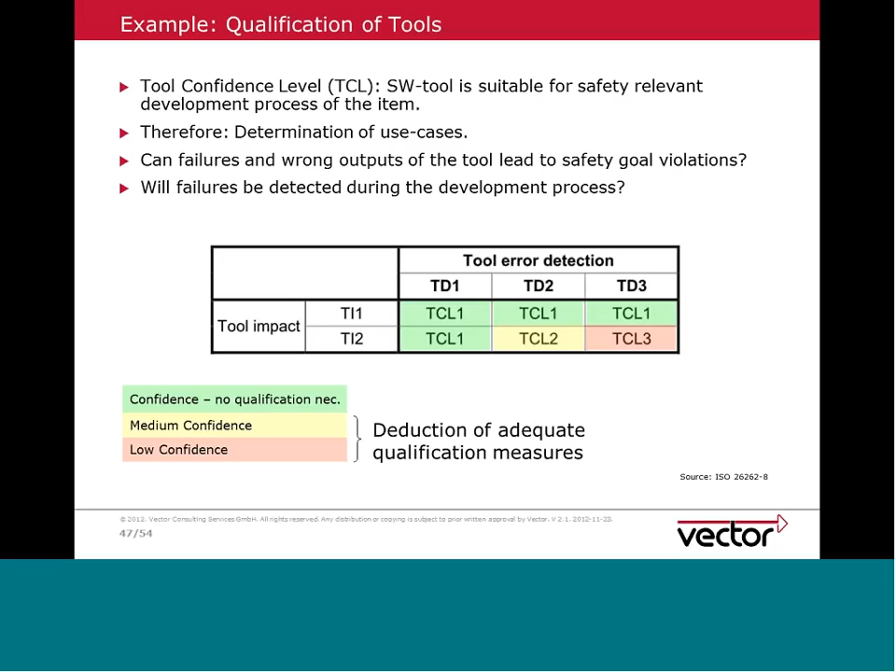A second factor is tool error detection, which tells us to which degree we, or the tool itself, would detect a defect when using the tool. Based on these two factors—tool impact and error detection level—we arrive at a tool confidence level, TCL, where TCL 3 is the one requiring most attention, because it means we should very well analyze in which context the tool is used.

And then, of course, the standard also gives recommendations, such as to what degree the development process of the tool has been according to standard, etc.

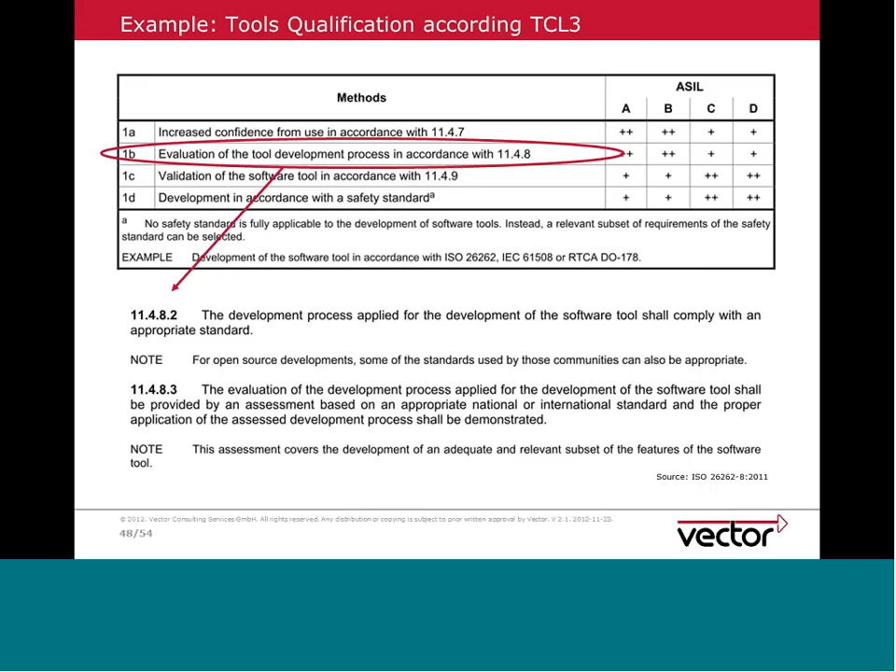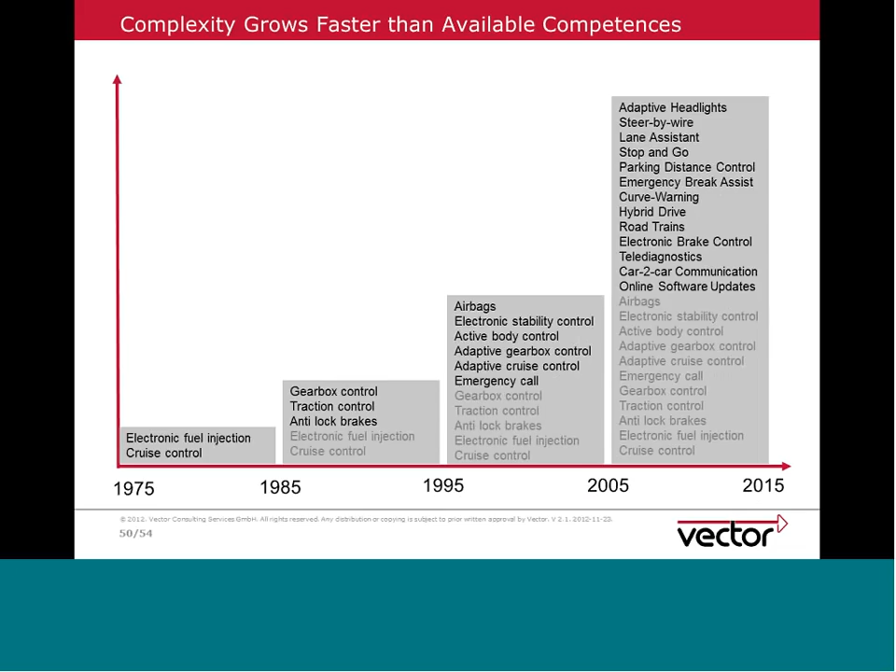To summarize, after this brief overview on safety measures, and to still allow time for questions and answers: what we face today is an increasing amount of complexity caused by a huge number of different functions based on E/E equipment, assistance functions, etc., which increasingly interwork and at the same time have an increasing impact on driving dynamics.

That means we need to grow competence in the same way, but as we are all aware, we not only have a lack of engineers, but a clear lack of safety experts in most companies. For that reason, it's important that process and tools, to a high degree, facilitate those scarce resources so they can work most efficiently in implementing ISO 26262.

And that's yet another example of why we highly recommend having an adequate workflow and tool environment for your engineers, to make sure they don't waste their scarce energy on things which can really be automated.

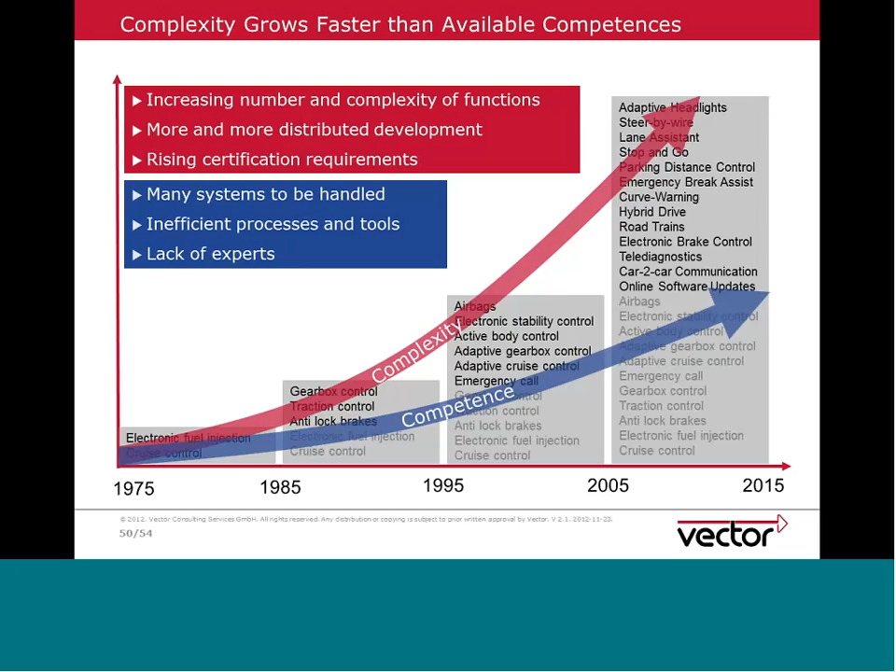Safety demands tailored solutions, starting with the product. We have to understand the product, we have to understand the hazards, and then we have to see how, by means of redundancy or reuse, we can optimize or balance cost and benefits in terms of achieving safety.

From a process perspective, we already emphasized that there is a strong benefit from being already exposed to CMMI or SPICE, not only because it helps with continuous improvement, but also because it gives a good baseline of process culture across the company.

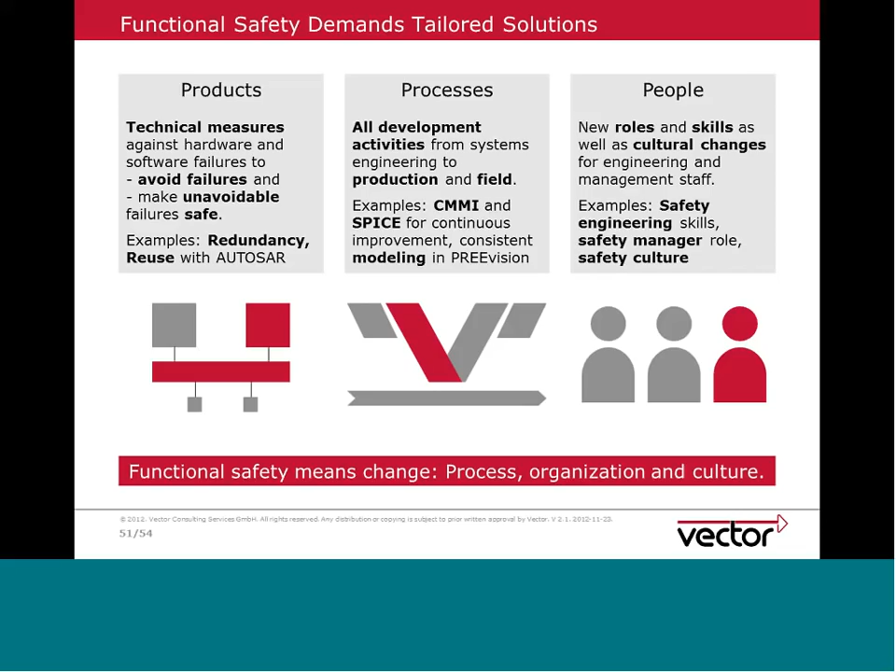Thirdly, people. We talk about competences, about skill profiles, but we also talk about culture. As I said earlier, it's pivotal that engineers understand their responsibility and impact on achieving functional safety, and no one in the company should simply point to a safety manager as the safety expert, because that puts you in a situation where the safety manager not only becomes a bottleneck, but also wouldn't really be able to do his job, since he is not the person who has to engineer for safety.

Where do we go from here? If you look at automotive OEMs, it's about improving process capabilities. Most of the OEMs we work with are very capable with respect to understanding ISO 26262, but it's now more important to think about what kind of collaboration is necessary at the systems level, where a lot can still be improved.

Tier 1, Tier 2 suppliers of established safety-critical components typically need to better connect into field observation abilities, also for a complete safety case, so that the life cycle support is sufficient.

Often what we see with OEMs is that it's hard to have a full picture of what the ECUs are and what the dependencies are in a specific passenger car, say 5 or 10 years after it's been put into the field, where so many changes have been made. It's very difficult to still manage all these dependencies.

Now, for suppliers of new innovative components, for instance, along the electric powertrain, battery systems, etc., here the need is to quickly ramp up because the market doesn't really give much window to recuperate. So this means reuse best practice concepts, introduce state-of-the-practice tool chains, etc., so that you can concentrate your energy on your product and not so much on ramping up the ISO introduction.